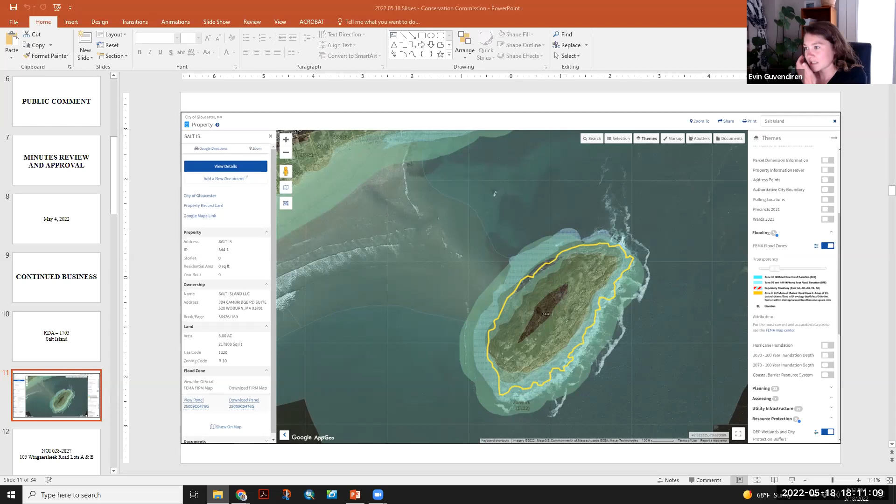Adrian, do you want me to share screen? Nope, I have it right here for you. There you go, excellent. Do you have the other figure perhaps? Sure, okay. This one? Yeah, that one. Yep, thank you.

So, to give a brief recap of the project, the RDA was first submitted in June of 2021 for the use of grazing animals for vegetation management on Salt Island. Since then, we've been retained to provide the commission with supplemental information. We've conducted several site visits and done an inventory of the existing vegetation, and I've also had multiple conversations with Goats to Go.

They're the company that will be supplying the goats, and we talked about means and methods for having the goats out there. First and foremost, Goats to Go is not concerned at all with bringing the goats out to the island. Goats are afraid of water, so there's no fear of them escaping off the island. So the plan is here.

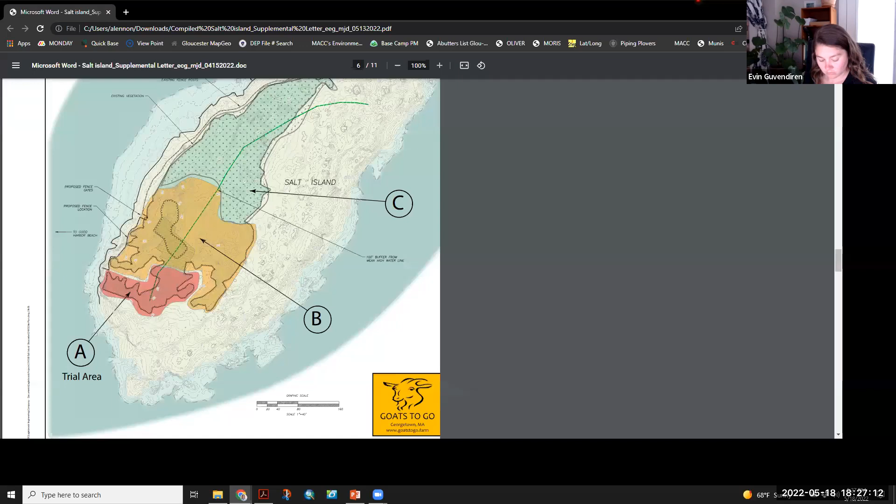I am extremely troubled by the fact that these and other concerns that were put forth at the initial presentation of the project a year ago have not been addressed or even mentioned in the supplementary information presented today. I have little confidence that the community concerns will be responded to if the project is allowed to proceed. Thank you.

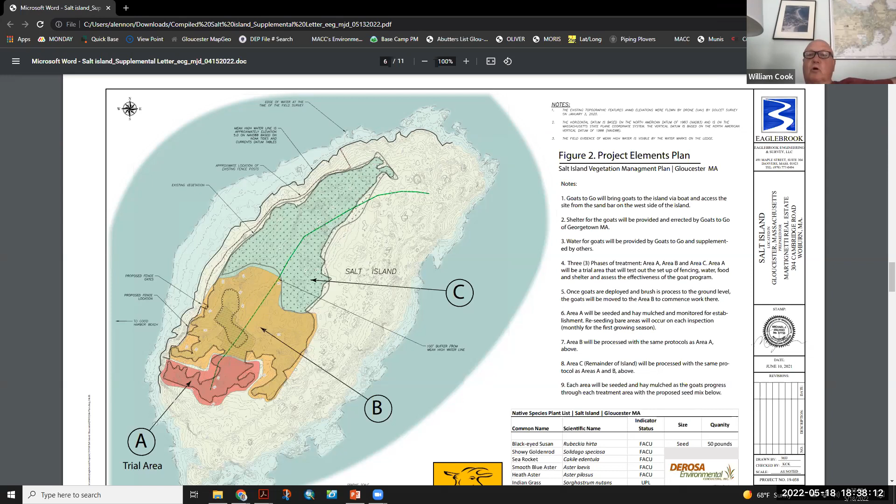Okay, Commissioner Cook. I agree with all the previous comments I brought up, even based on Goats to Go's website. Goats will eat down to the root and denude the entire area. What I'm about to say, I'm not even sure if it's correct, but I am going to strongly suggest that the applicant request a withdrawal without prejudice, because using goats in this area is a no-go. They need to remove everything that they've done and allow the island to revegetate to the point that it was before they went out there and started using chainsaws and crews to pull and remove stuff beforehand. There is absolutely nothing that this applicant can do to convince me to move forward on this, and using goats is a non-starter to begin with. Thank you.

Okay, Commissioner Gradwell. I think that everything that I could possibly bring up has been brought up, and we'll just wait for some good answers, including why not use a hand pull.

Okay, Commissioner Sargent. Yeah, the coastal bank, which is a resource area, isn't delineated on the plan. And it appears that these proposed activities are in that resource area and not in a buffer zone. Then the exception for the grazing of animals and installation of fences is not valid because the applicant has not provided sufficient information that the shallow overburden of soil on Salt Island would not be eroded by this proposed activity. I believe there should be an NOI, the detailed vegetation management plan, if the applicant wishes to proceed.

Thank you. Okay, Commissioner Sherman. You are muted. I'm sure Chris Leahy knows this better than me, but perhaps other people do as well. But I'm concerned about the

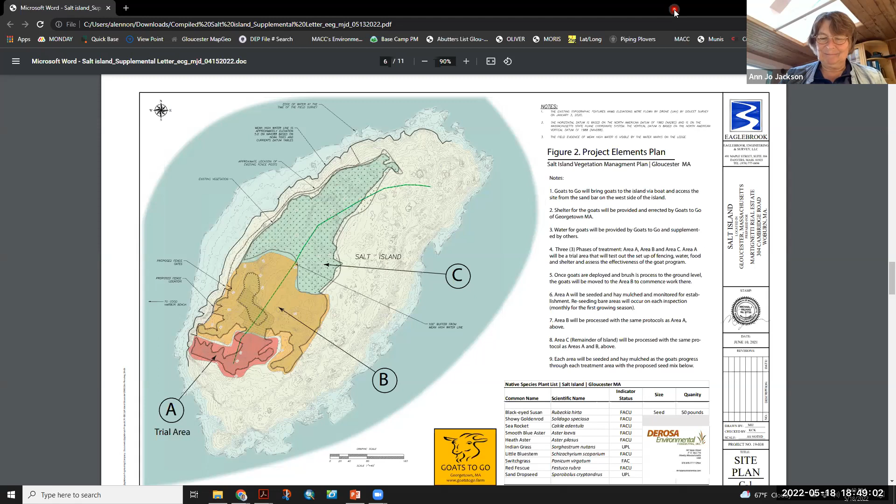Thank you, all. Evan, have a good night. Adrian, we will miss you. Oh, you will see me around, I'm sure. Good night, everyone. Good night, Mike. Good night.

Okay, next up we have NOI 028-2827, 105 Wingaersheek, lots A and B, owned by 125 Wingaersheek LLC, represented by Joel Favazza of Seaside Legal Solutions LLC.

Good evening. For the record, Joel Favazza, Seaside Legal Solutions, 123 Main Street in Gloucester, here on behalf of 125 Wingaersheek LLC. At our last meeting, I had proposed to the commission that a letter provided by Mike Seecamp be considered as a replacement for the third-party review, which has not yet happened.

Again, this stems from commissioner concerns primarily relating to isolated wetlands down by the road, to see whether they were hydrologically connected to a larger wetland system on the other side of the road. There was also some question about the impact of a second driveway being proposed.

Basically, to get a handle on it ourselves, we went and had a third party kind of informal review done for us by Mike Seecamp. And anyway, at the last meeting, I suggested that might be an alternative.

The commission hadn't had a chance at that time to actually vet that letter, so we decided we'd come back in two weeks and see what the will of the commission was—whether they thought Mike Seecamp's February letter was acceptable and gave the commission sufficient comfort to move forward, or if the commission still felt like we needed to go get yet another set of eyes on the delineation and proposal.

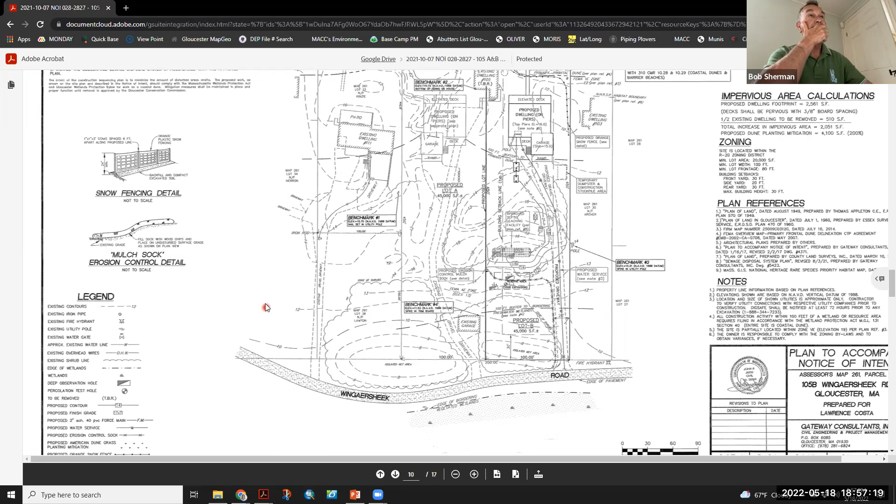Chairwoman Jackson. I also agree with the third-party review. I think DEP is very clear that there is no new construction in primary dunes, and this has to qualify as new construction, with primary dunes being significant to storm damage and flood control. So I am not willing to make a decision on this project as it stands.

Okay. Did you have any further comments, Adrian? No. Mr. Favazza, would you like to respond?

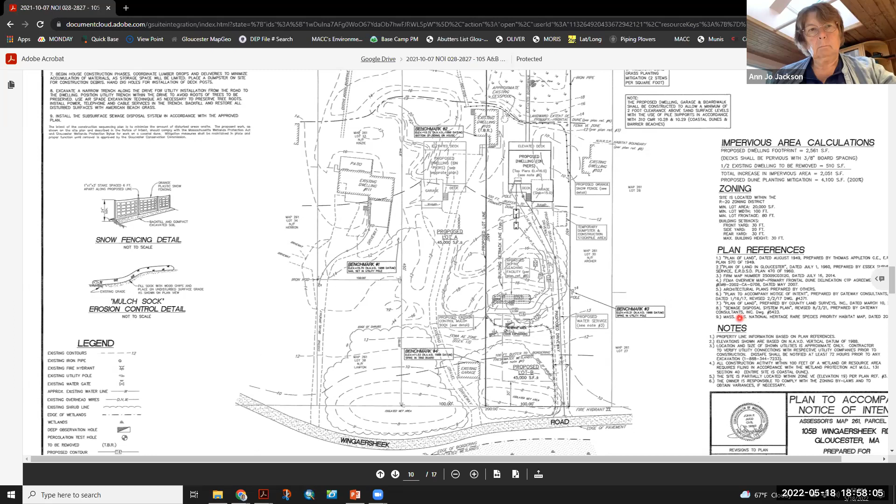Yeah, thank you so much. So to the question posed by the neighbor, I want to just respond that yes, both proposed houses as shown are further back from the primary dune than the existing house, and further back than a house with about 4,200 square feet more disruption that you've already permitted on this site. The large house you previously permitted on the site, without third-party review mind you, is level with the existing home, and that's building permit ready right now. We're trying to go to 2 smaller homes further back from the dune. So to the neighbor's question, yes, if we're able to build these 2 smaller houses, we will be further back from the primary dune than the existing house. If you're not able to build these 2 smaller houses, then no, the much larger house is going to be built right up to the line where the existing house is.

And then also for the commission's edification, John Judd, who prepared the plan, is on the call tonight, and Mike Seacamp, who wrote that letter, is on the call. So if, for example, there are any questions about the 8-foot contour determination or about the primary dune delineation that would enable this commission to move forward, he can probably answer those questions for you versus us going back out. But again, it's the commission's will. If you say we need a third party, we need a third party, but he is here tonight and could potentially quickly answer those questions you may have after reading his letter.

Okay. Go ahead. That's all I have. Thank you. Okay. Does Mr. Judd wish to speak?

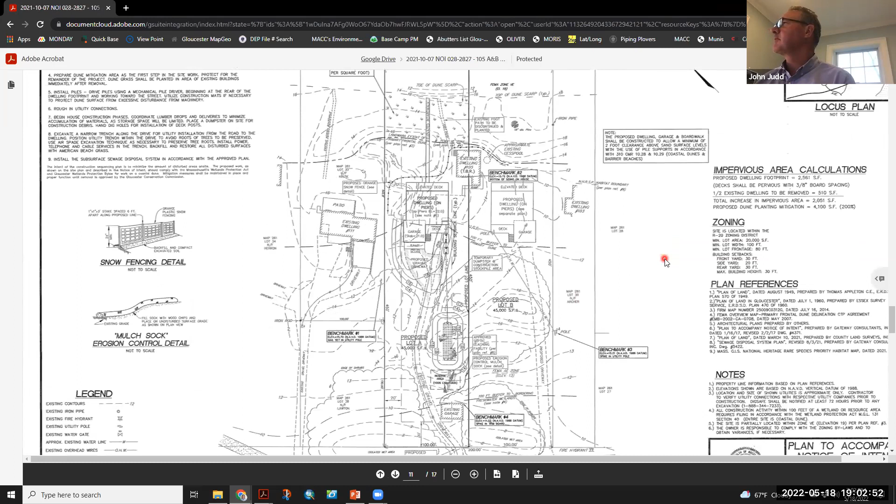Okay, thank you. Did you have anything else to add? No, other than I know that the previous project is not on the table, but just looking, the issues usually are impervious surface, not how many buildings, but how much surface is being created in a resource area like this, and there is a reduction from what was previously approved. I'll leave it at that, thank you.

And that is absolutely the case in redevelopment. This is not redevelopment. This is new construction, and it's new construction in a primary frontal dune, which is assumed to be significant to storm damage prevention and flood control in and of itself. And I don't see how this rises to the standards of permittability.

Well, if I may, Madam Chair, the reason that there isn't just a machine that we check a bunch of boxes and say does this qualify or not, the reason there are humans involved in this, so there is a pragmatism to this, right? And if your charge is to do what is best for the ecological resources on site, well, I appreciate, as Ms. Lennon has educated us.

Previously, and as you've explained tonight, this is a de novo review, and you are comparing what the plan is. You are human, you are knowledgeable of what is going on in reality out there. And I would urge the commission to make choices that lead to ultimately the right construction project happening out there versus the one that technicalities may force a less desirable situation for the resource area than being pragmatic and looking at the situation in reality, not just in technicalities.

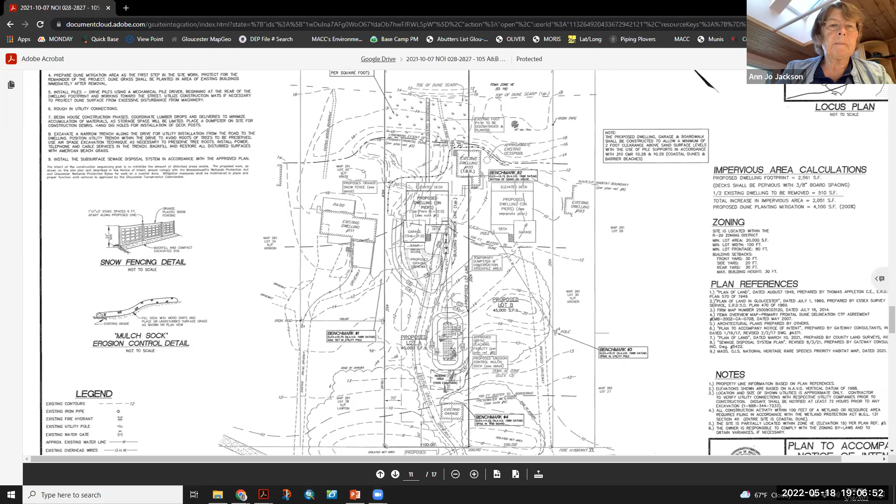Mr. Gradwell? We lost him. No, he's with us. He says yes, I see him. Commissioner Sargent, Yes. Commissioner Sherman, Yes. Chairwoman Jackson, Yes. Thank you.

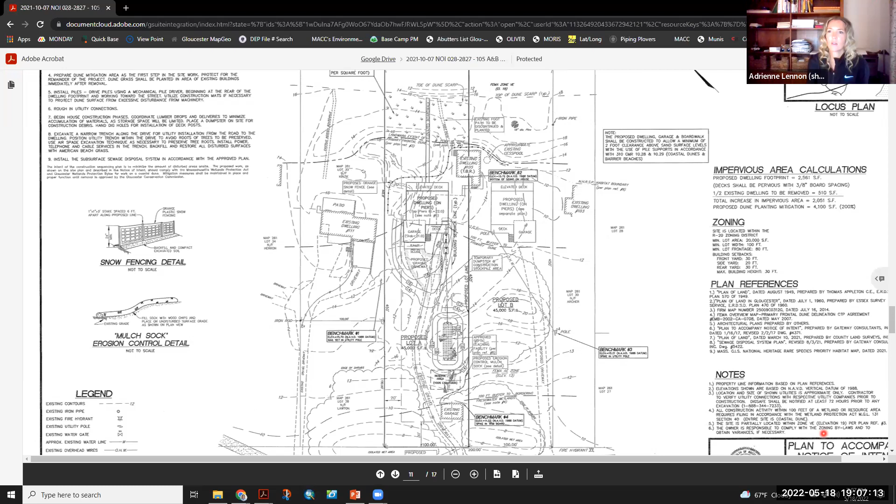I want to comment for the edification of the public. I can see there are a couple of hands up in the attendees, however the public comment period has closed for the hearing for 105 Wingaersheek tonight. So if you are aiming to comment on 105 Wingaersheek, that opportunity has passed for tonight. You can always submit your comments in writing to conservation@gloucester-ma.gov, using 105 Wingaersheek Road lots A and B in the subject line, to have the conservation clerk, Deb Laurie, put it in the administrative record. Otherwise, you will have to wait till the next hearing on June 15th to speak.

And the next opportunity to speak will be on the next matter before the commission. Now I'm studying this, and Dave Caouette, you are here tonight. The commission has not moved 51 Forest Street yet. If you would like, we can certainly open the hearing still. Yes, please. Okay, we will now hear NOI 0282836 at 51 Forest Street, Haskell Pond, presented by City of Gloucester DPW, represented by David Caouette at Pare Corporation.

Yes, thank you very much for hearing us today. I also have with us Lauren Gluck, one of our wetland scientists. When we last spoke, it was at the March 18th meeting, and there were a couple of comments to our plans. We also met on site to do a site walkthrough on April 26th with a few members of the commission. At that time, we did the site walkthrough, mainly to illustrate to the commission the scope of the work.

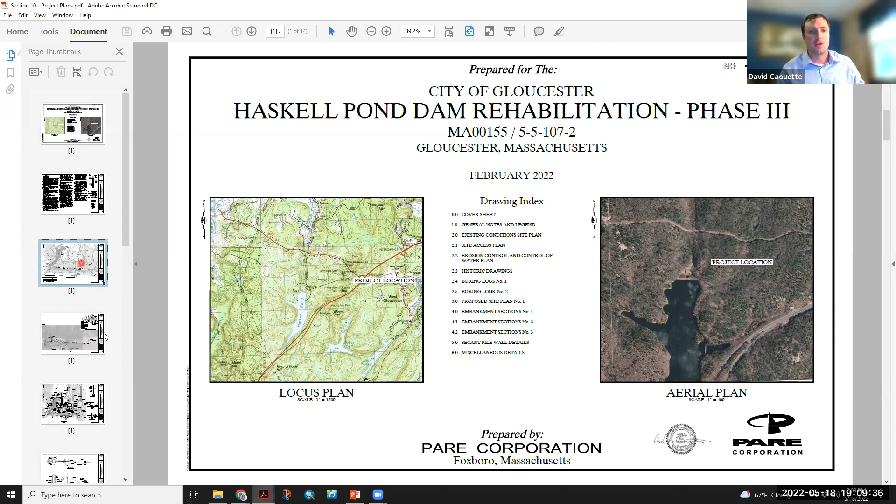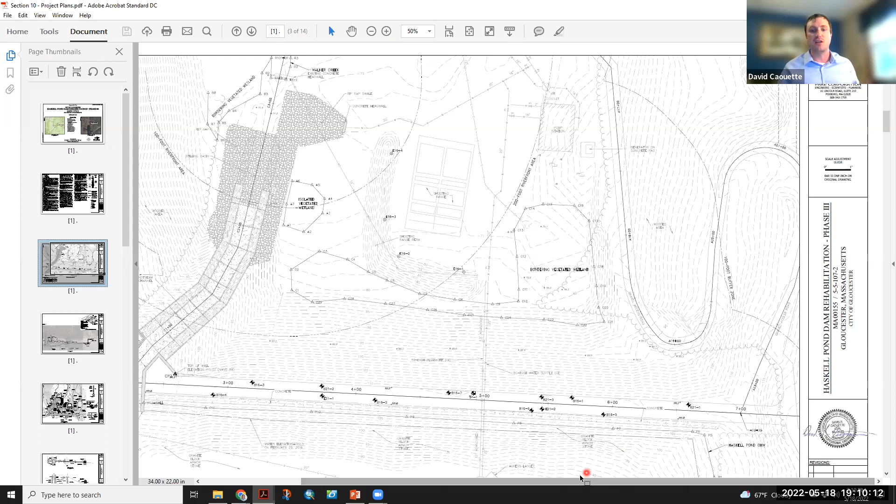So on sheet 2, in the walkthrough, we did walk through the secondary access road, and the general comments from the commission were that it was a much more established road than previously thought, but the comments were that we should remove the secondary access road from this submission, as it did represent a slight change from what we had permitted back in 2016, and that if we do need the secondary access road as we progress with the construction efforts, that we permit that through a separate process.

So on sheet 2.1 of our plans, we have that secondary access road removed. I'm not sure, I have an updated set here. Adrienne, if you want me to share my screen, because on the drawings you have here, you can see that secondary access road going through the woods. Right, and you're removing this from the plan set. Correct. Okay, I can give you permission to share. Go ahead.

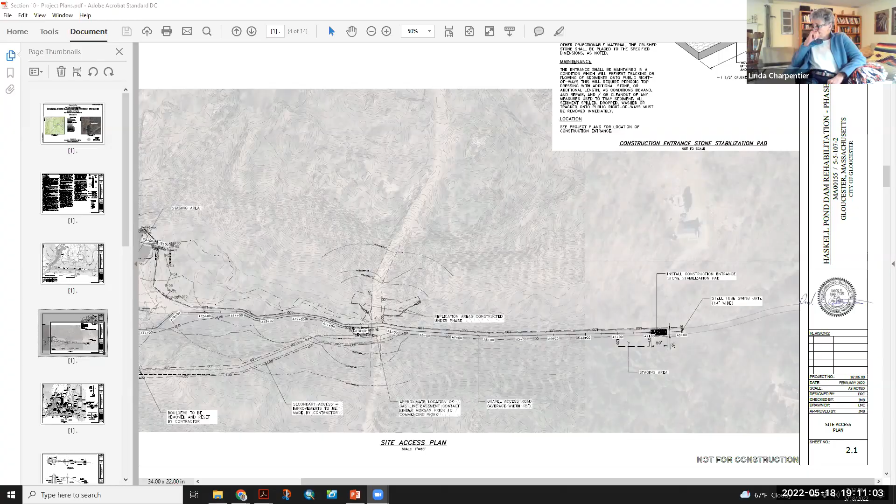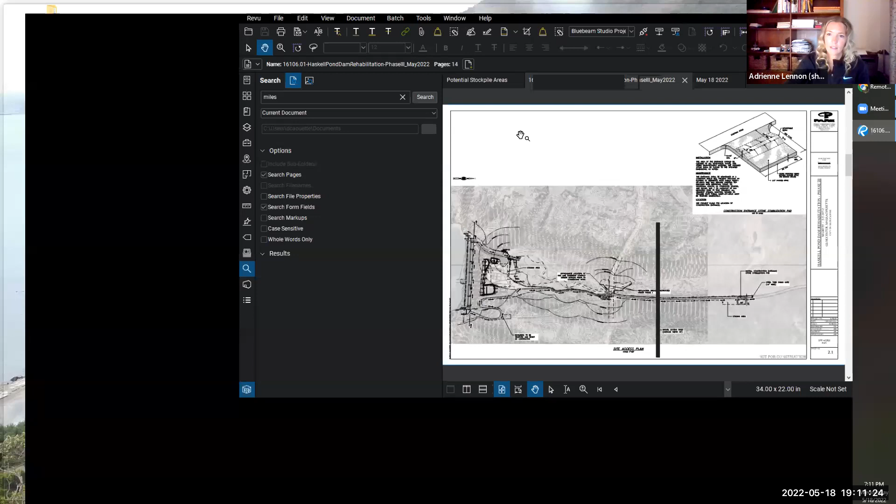Should be it. So can everybody see the screen? Yes. Okay, so as you can see here, the secondary access road. Whoa, what are we looking at? Sorry, we're looking at a nice bridge. Golden Gate Bridge. That was the Golden Gate Bridge.

Just checking. Okay, here we have removed the secondary access road. We still have the outline of the road highlighted, but we've removed it from the limits of disturbance. So in the future, we'll have a couple more conversations with potential contractors. If we deem it necessary, we'll submit that as a separate permanent access route.

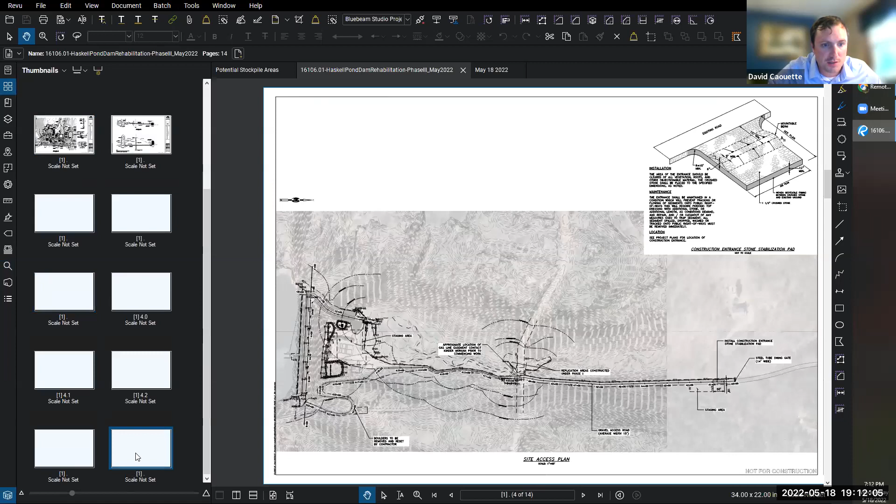The other change that we made to this sheet in response to commissioner comments was we added a detail for an erodible material stockpile. Basically we would surround the material with compost filter sock on the site, and then we have a note that if the material is not being planned to be used or filled in within a certain number of days, then we would cover that stockpile with a geotextile filter fabric, which would help shed rain off the pile before it could really erode the material. And then, as normal in our construction specifications, we would require the contractor to regularly check the erosion controls and make any necessary repairs or move built up material as needed.

As relating to one of the commissioner's other comments, we had some estimates for the amounts of material that would be generated.

So this is one of the sections of the dam where we would be excavating down to install our secant wall and parapet wall. Top of the dam is currently at elevation 111. We would have to excavate down to elevation 103 to create a working platform large enough for the equipment to install this structure. There'll be some isolated excavation in sections that will go down as far as elevation 100, just to stabilize the working platform and remove potential obstructions that may interfere with the equipment needed.

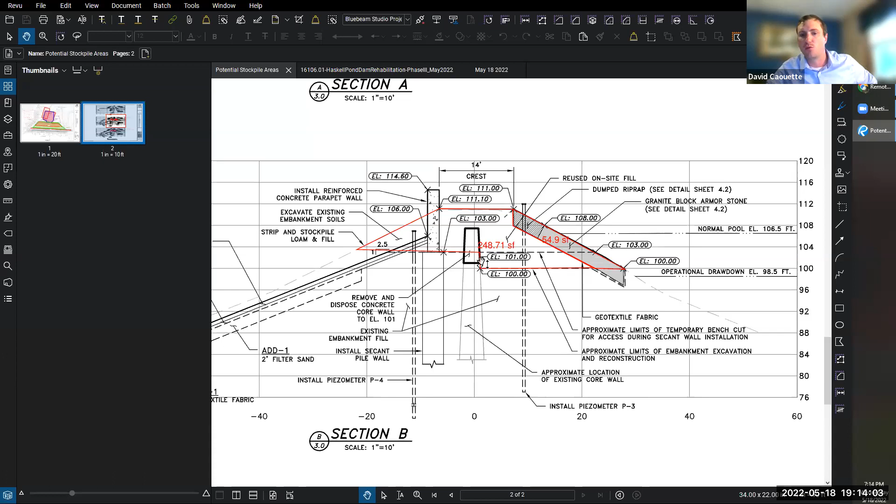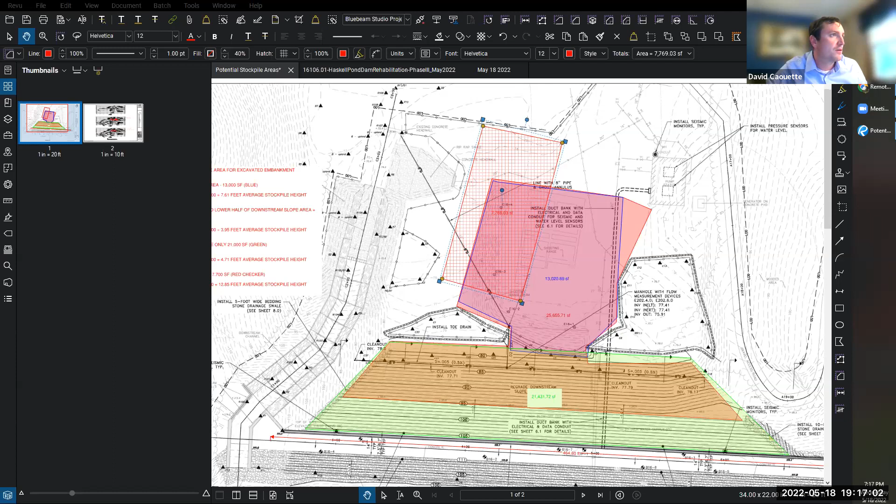We did have a meeting with Ms. Tori Kim, who is the MEPA director, or assistant secretary there. We had a conversation with her back in, I think it was in February -- it may have been, it was November. Okay, it was back in November, but then we followed up with her because we didn't have anything in writing from the meeting.

So we asked her to provide a comment to the commission saying that there would be no additional MEPA review. And she then followed up pretty recently, I think it might have been last week, saying that it would not require further MEPA review. You have the email pulled up.

Okay, great. And that no other state permits are needed for the work. So that is accurate, that all the state permits accounted for in the original MEPA filing, that's not changing. There was one state permit we did not move forward and obtain yet, which is the dredge water quality certification, but that was only required for the phase 3 work, which is forthcoming. We did account for that in the MEPA filing, and the dredge water quality cert office was copied in the distribution list for the ENF. So I think we're pretty satisfied with her response that there's no more MEPA review needed.

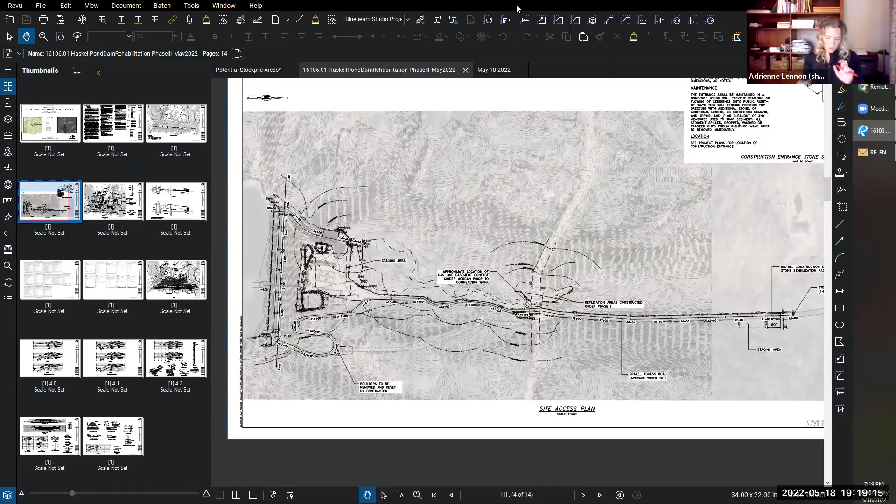Okay, thank you very much. I'll close the public comment period and move on to commissioner comments. Commissioner Charpentier, no comments. Commissioner Cook, no comments. Commissioner Gradwall, no further comment. Commissioner Sargent, no comment. Commissioner Sherman: my primary concern after the site walk was the secondary access road itself, and as that is no longer proposed, I have no other comments.

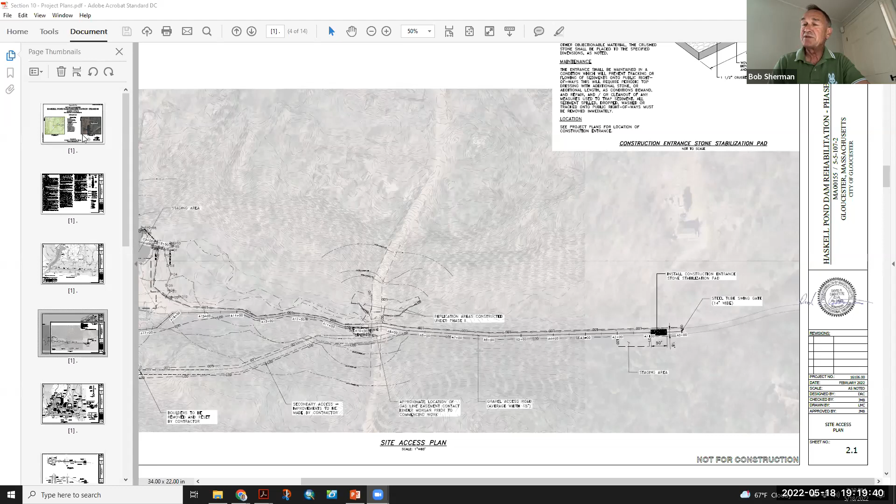Co-Chairwoman Jackson: I have no comments other than appreciation for the responsiveness. Thank you. In that case, I think we are ready to move forward.

I'm willing to entertain a motion to close the public hearing for NOI 0282836. Charpentier moves to close the public hearing for NOI 0282836 at 51 Forest Street, Haskell. Gradwall seconds. Roll call: Commissioner Charpentier, Yes. Commissioner Cook, Yes. Commissioner Gradwall, Yes. Commissioner Sargent, Yes. Commissioner Sherman, Yes. Co-Chairwoman Jackson, Yes. Thank you.

We'll entertain a motion to move forward with the project. Charpentier moves to approve NOI 0282836 at 51 Forest Street, Haskell Pond. Gradwall seconds. Before I do a roll call, Mr. Caouette, could you please make sure you send me those updated plan sets and the MEPA email if you haven't already? I am a little underwater. Yep, I will. Commissioner Charpentier, Yes. Commissioner Cook, Yes. Commissioner Gradwall, Yes. Commissioner Sargent, Yes. Commissioner Sherman, Yes. Co-Chairwoman Jackson, Yes. Thank you.

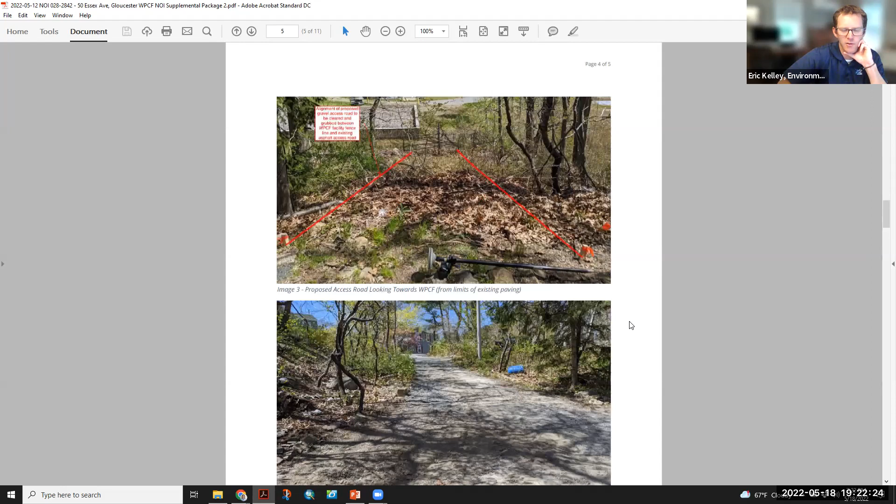We prepared a small supplemental letter that we shared with Adrienne's office, which she has on the screen now, to provide supplemental photography and rough limits of the access road. Generally speaking, the access road is 10 to 14 feet wide and about 60 feet long between the existing treatment plant fence line and where it meets existing asphalt coming off Marshfield Street. So it's roughly 650 square feet. Generally speaking, it's woody debris, leaf litter, relatively free of trees.

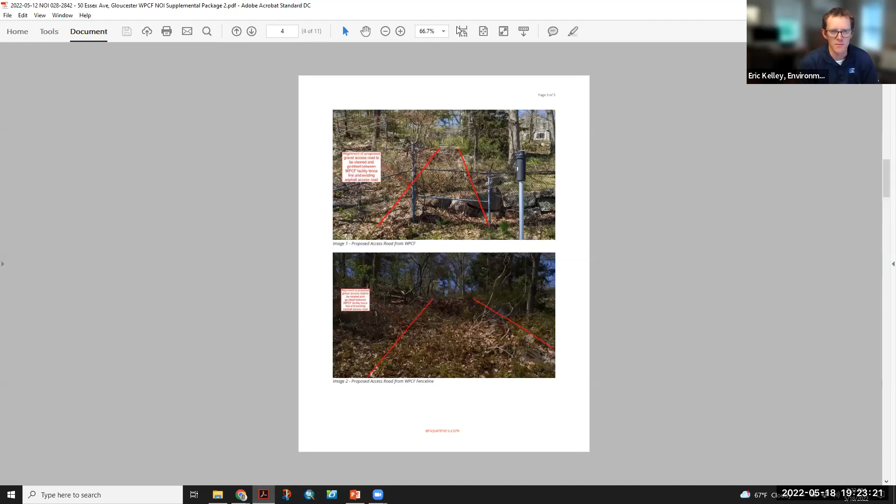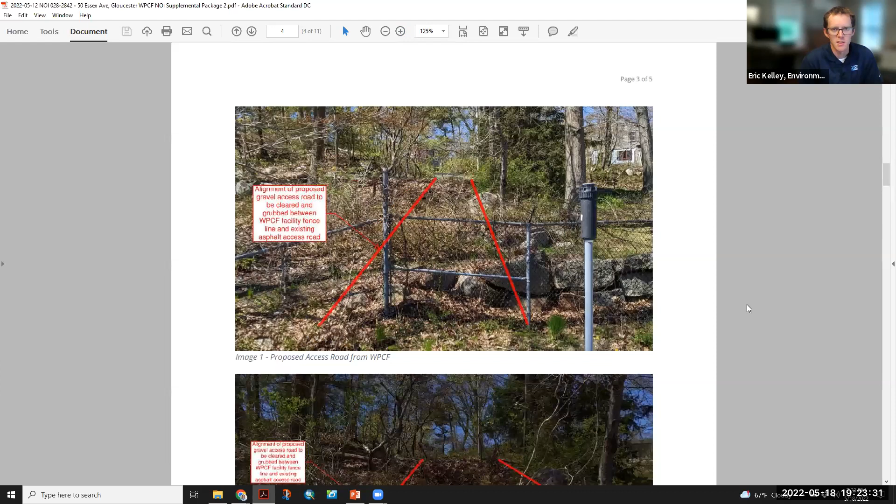There was some invasive species, Asiatic bittersweet, present. The existing trees that were brought up during the last hearing are outside the limits of the proposed access road and actually on the abutting private property to the city's parcel, so those would not be directly impacted by the access road. Generally speaking, we're talking about clearing and grubbing, some boulder removal to allow for installation of the gravel road. We would also be doing invasives removal within the limits of that access road within the right of way. So the photos presented in the supplement show orientations looking uphill and downhill, just to give you a feel for the existing conditions.

The second piece: we worked with Brian Madden from LEC to enhance our proposed restoration plans around the edges of our project. On the western edge, we have the coastal bank that will be abutting our earthen berm, which is part of the flood resilience system. On the eastern side, we have coastal bank that will be downslope of the proposed sheet pile wall. Along Essex Avenue, we have some additional enhancements in currently turf grass areas, as well as the additional plantings we presented two weeks ago at the northwestern corner. That is provided in a supplemental plan that Adrienne has on the screen now. Brian's here tonight if you have any questions regarding the plantings themselves, and Dylan, my colleague, is also here just to answer any questions you might have concerning the restoration or the access road.

Okay, thank you very much. First, we'll open it up for public comment. Is there anybody in the audience who wishes to comment on the project at 50 Essex Avenue, NOI 0282842? Madam Chair, there are 13 panelists on the call, 30 attendees, and it appears no members of the public wish to comment at this time.

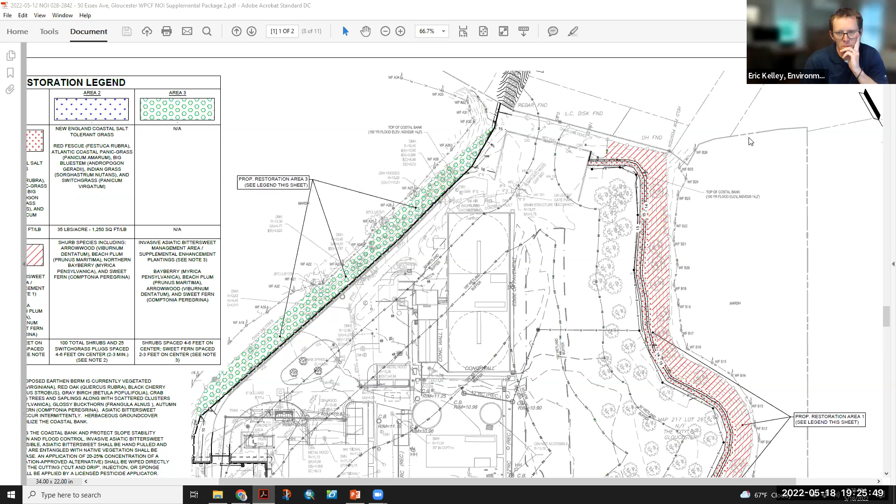Commissioner Sargent: Thank you for the additional mitigation plantings. With regard to the access road from Marshfield Street, could you please explain what, quote, relatively free of trees, unquote, refers to, and the number of trees that maybe are 7 inches or greater in diameter? Finally, there should be a 2-year monitoring for mortality of the mitigation plantings. Commissioner Sherman: No further comments.

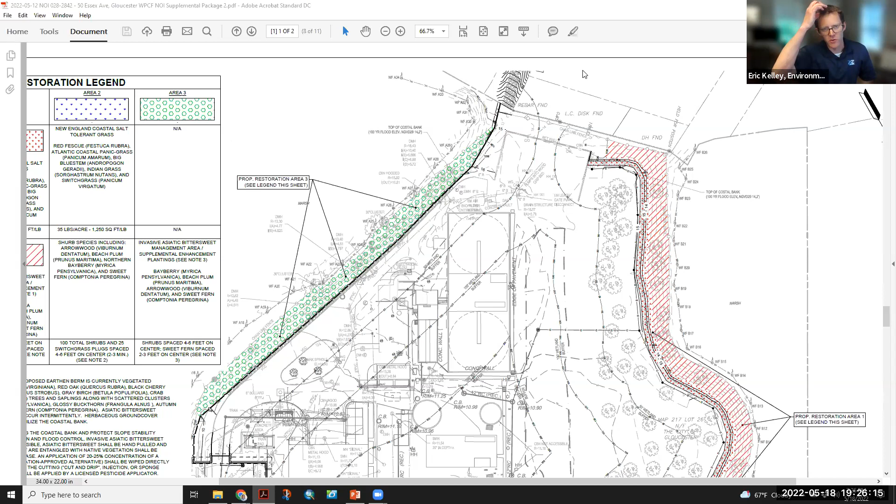Chairwoman Jackson asks for further comment. Commissioner Sargent's question is answered: there are no trees greater than 6 inches within the limits of the proposed gravel access road.

I want to thank Eric Kelley and Environmental Partners for their considerable efforts to install restoration planting and improve the perimeter of the entire property. Once the berm is up, it's very likely it won't be impacted again, so installing nice plantings on the resource area side is a great opportunity, and I'm happy you're taking the trouble to do it.

I'll point out there's some invasive species just off the plan set here, still on the parcel, that wasn't included. My hope is that if Environmental Partners needs to come back and amend the order of conditions, they would include that additional planting and restoration work on this side of Essex Ave. That would make it a very complete site given the circumstances, and I look forward to seeing the finished project.

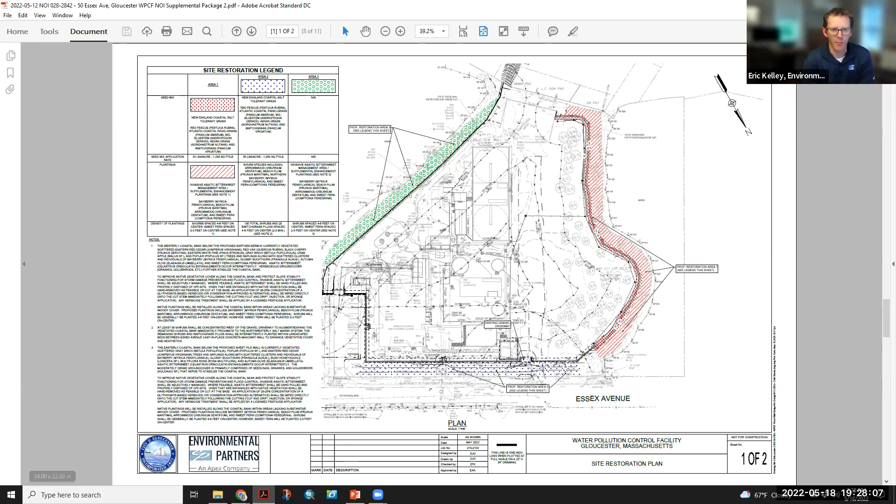Adrian, would that area you're speaking of be the one where I don't know how the boulder pile came to be, outside the fence line to the northeast? That's the corner, correct. It's kind of like Phragmites, but I might be misspeaking—I'd defer to Brian on that. There's a large boulder pile I'm assuming came from past city projects.

Yes, that's correct. Of course, it's not inside the scope of the work tonight, and I agree they've done a very nice job coming up with a robust planting plan, which I appreciate. However, when it dead ends over here, it dead ends into a stand of invasive Phragmites, among other things, and there's some fill and generally degraded blight that will be the last of what's there. So we can bring that up with DPW for consideration, either outside of this project or under a future action.

Okay, thank you very much. I think we're ready to move forward with this. Linda, would you like to make a motion to close the hearing?

Charpentier moves to close the public hearing for NOI 028-2842, 50 Essex Avenue. Gradwell seconds. Roll call: Commissioner Charpentier, yes; Commissioner Cook, yes; Commissioner Gladwell, yes; Commissioner Sargent, yes; Commissioner Sherman, yes; Chairwoman Jackson, yes.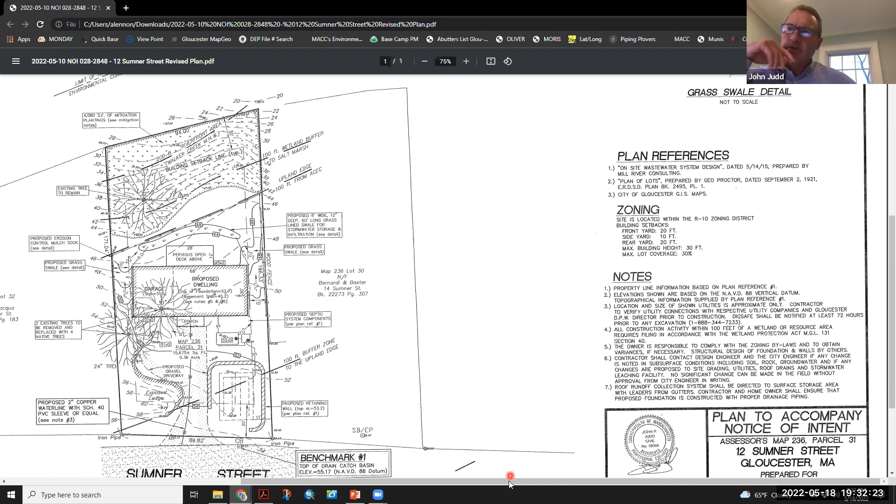In addition, we've added the variance note requested for the proposed leaching facility being within 200 feet of the ACEC—we're just shy of 200 feet, at 193 feet, as shown on the note. As far as addressing the equal and equivalent environmental standards that are required, this is a system that has advanced treatment and pressure distribution.

So that is part of the design. And we did add the impervious area calculations, and we did correct that error with that erroneous number. We did shade the total mitigation area as requested, and as shown on the plan, we have the mitigation notes as well as the impervious area calculations. I just want to remind the commission, we did have a report that was submitted from Mary Rimmer that is made part of this application for the rejuvenation of that buffer zone and the replanting and mitigation.

So I can answer any questions that you might have at this time. Great, thank you very much, Mr. Judd. We'll open it up first for public comment. Is there anybody in the audience who wishes to comment on NOI 0282848 at 12 Sumner Street?

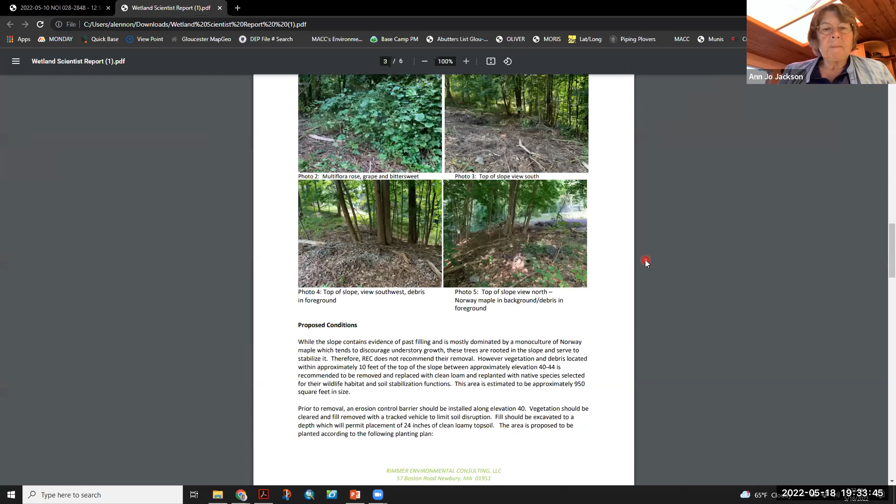Madam Chair, there are 10 panelists on the call, 30 attendees. Christine, I see your hand up first. I'm going to allow you to talk and ask you to unmute. Go ahead, and name and address for the record, please. I'm Christine Baxter of 14 Sumner Street.

The revised plan was only made available yesterday, but there are some things that are concerning about it. The revision is in conflict with the Board of Health approved septic plan. That plan had a reserve leach field that has been removed from the new plan, and the proposed house has been moved forward over the area of the reserve leach field. Should the Board of Health first review any changes now that the plan they approved has been altered?

The Board of Health plan also had specific drainage details to ensure that all drainage would flow away from the leach field and property line, and the revised plan does not include any of those drainage details. Given the size of the proposed home and the amount of impervious area being created, we want to ensure that all water is able to remain on 12 Sumner Street and that there is no runoff onto neighboring properties or Walker Creek or the area of critical environmental concern.

Also specific to this new plan, the retaining wall has been removed from the upland edge, but not replaced elsewhere. This is a concern because much of the construction would be on previously filled land with a significant drop off in the upland area, which flows down to the James property and into Walker Creek. We still have many of the same concerns that were raised at the previous meeting that have not been addressed.

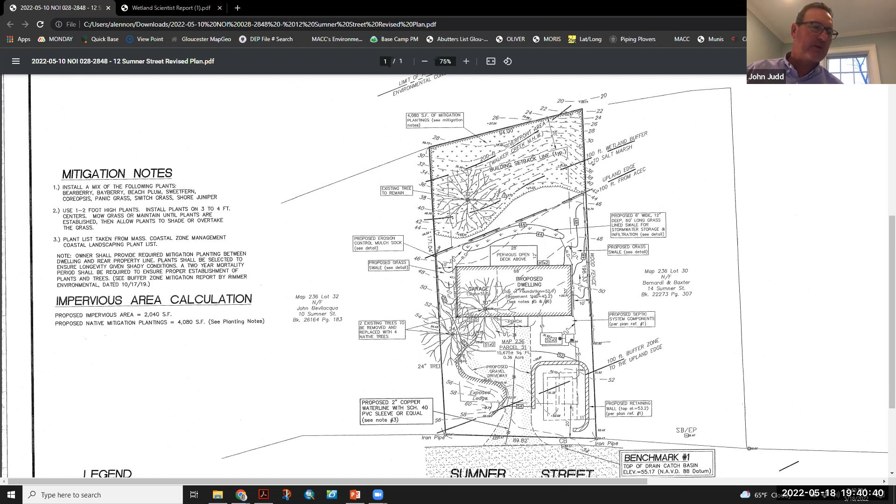Yes, thank you, Madam Chair. I'll go backwards. As far as the drainage, we're showing exactly what was approved by the Board of Health in terms of the retaining wall. And the swales are also very similar, only we're adding additional treatment and mitigation planting. As you know, the drainage, as far as the abutters are concerned, is reviewed - all applications are reviewed by the city engineer, and that is part of the building permit process, as far as not draining onto other people's property, abutters, or the street.

In terms of the ACEC, with the enhancement of the upland edge proposed by Mary Rimmer, as well as the stormwater storage and infiltration area proposed as part of this plan, we are confident, as well as with the erosion control fencing and fortification that will take place during construction, that this will not have any negative impacts to both the ACEC as well as the neighboring properties.

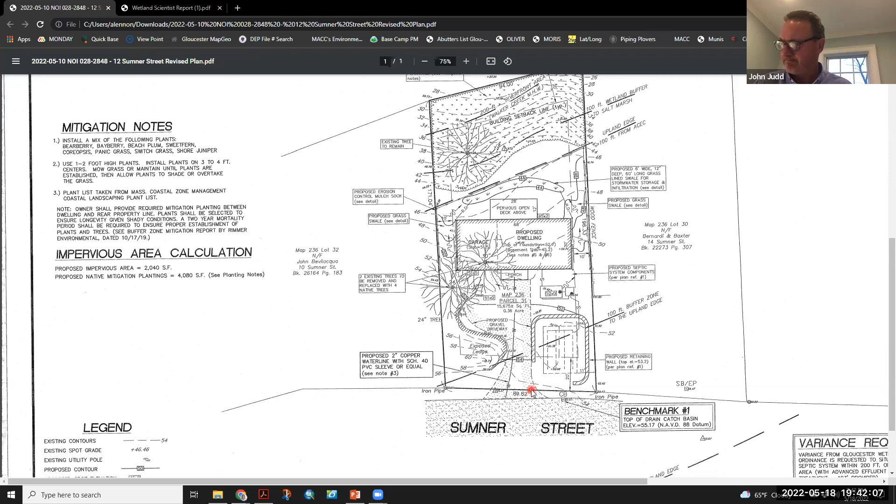And as far as the septic, again, this is what is shown on the approved plan that was prepared by others, and we showed it in the same location, same wall, same height. That's all I can really refer to. That is a plan that was approved in writing by the Board of Health as well, and they can answer any questions you might have. Okay, thank you.

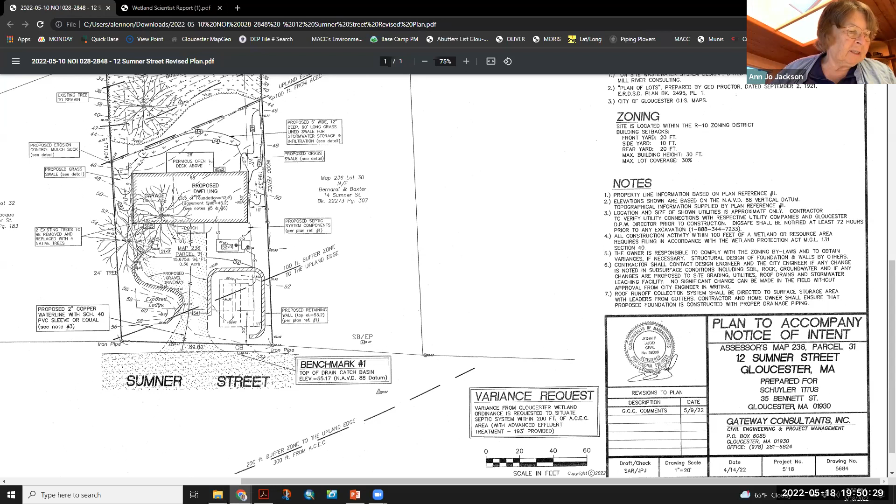Before we start this, I recused myself from this last time. In Mr. Gulla's absence, I will participate with the acknowledgement that I have sporadic social relationships with the owners in terms of occasional golf dates and occasional committee work. However, I feel I can be objective to this if no one objects.

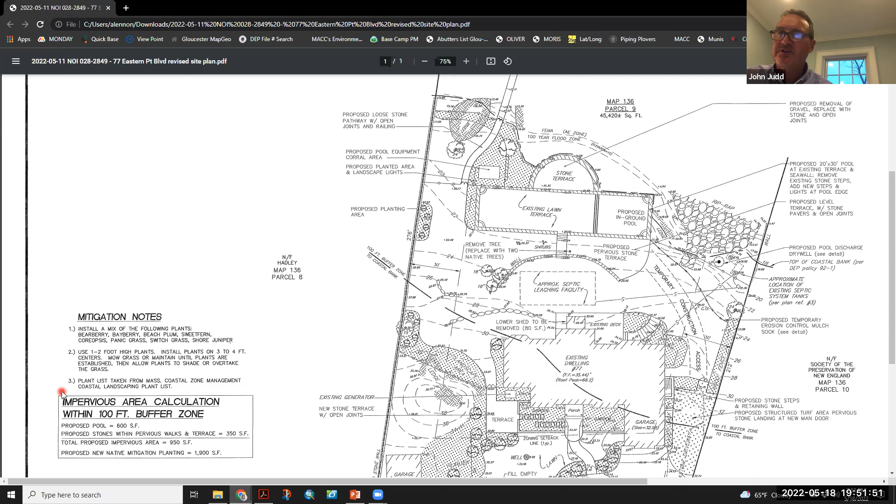Specifically, there was a request for the impervious area calculations, which we've added for the buffer zone impervious area, and the proposed native mitigation planting, which is essentially a large part of this project. The project itself, you may recall, is the in-ground pool construction and extensive landscaping across the property. This is the new home for the applicants, and they really want to spruce up the landscaping.

There was also a request for the pool discharge, where that would be discharged during drawdown, so we've added a detail for subsurface pool discharge drywell for those periodic times when the pool would be drawn down in the fall for winterization. That drywell is shown on the plan where we have sufficient soil, as indicated by the existing tanks installed about 20 years ago. We have some data on the soils over in that area, and that was adequate for the depth.

A big part of what we've done on this revised plan is we removed anything within the coastal bank. There was originally some stone steps that would be rearranged going down into the water within the coastal bank, and that has all been removed. So there's no activity proposed in that location at this time, or going forward.

An erosion control barrier was added, as well as the temporary construction access from the driveway to the pool area. I think that was requested.

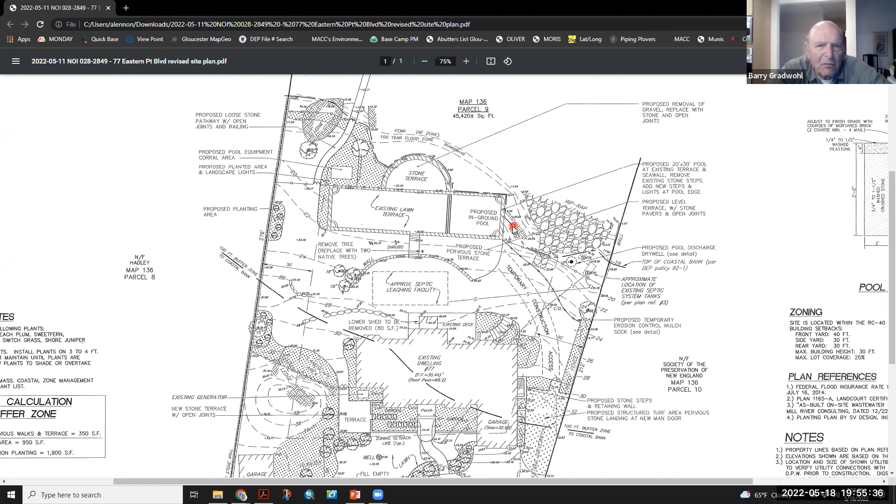Commissioner Gradwohl: appreciates them putting in the drywell and taking the steps out. Very nice job, thank you.

Commissioner Sargent: thank you for the revisions. There should be a 2-year monitoring for mortality of the mitigation plantings. That's it. Commissioner Sherman: no comments. Co-Chairwoman Jackson: no comments. It also should be noted that I did listen to the hearing last time.

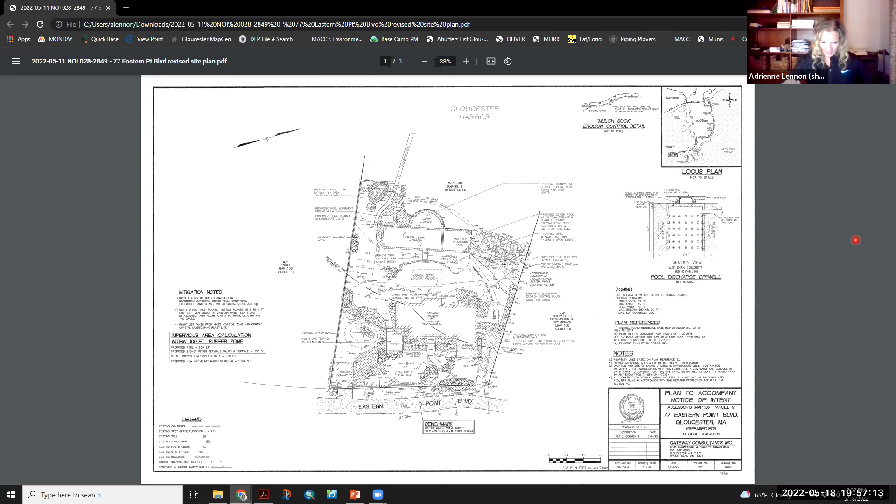I answer to both. Okay, thank you all very much. Have a good night.

Next up we have NOI 0282852, 57 Adams Hill Road, owned by Marilyn Short, represented by William Manuell, Wetlands and Land Management. Good evening everyone. Bill Manuell from Wetlands and Land Management.

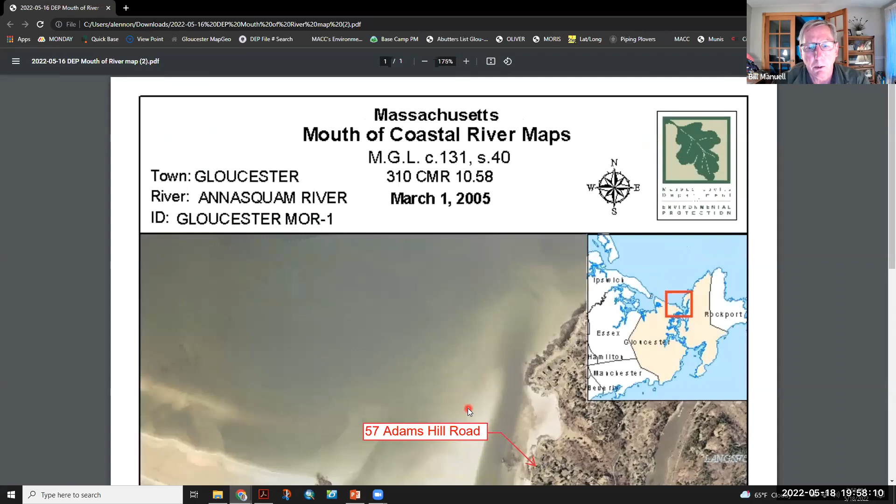We had some discussion at the first hearing. The first thing I'd like to talk about is there was a question of whether there was riverfront area affecting this project. I've submitted the DEP mouth of river map, and there it is. We are well upshore of that, so we are not within the riverfront zone of the Annasquam. We don't have any riverfront area on this property.

Secondly, I submitted a revised plan that cleaned up some drafting details. Adrienne, if you can pop that up, I'd like to walk you through that. I've clarified the limit of the deck that is going to be dismantled and rebuilt by using a single line on the outline of the deck. Recall it had a double line in the last plan iteration, and it was confusing with the limit of masonry walls that are going to be installed on that new pervious bluestone terrace.

The blue line there is the outline of a 2-foot, 8-inch high masonry retaining wall that's going to retain the bluestone terrace. Sitting right where Adrienne's cursor is now is one of those self-contained spas. It'll sit on a concrete pad, filled with water, and you supply power to it. I'm sure everybody knows what I'm speaking of. Surrounding that on the water side is a 6-inch tall granite edging to define a planting bed, so folks aren't looking at the side of the spa.

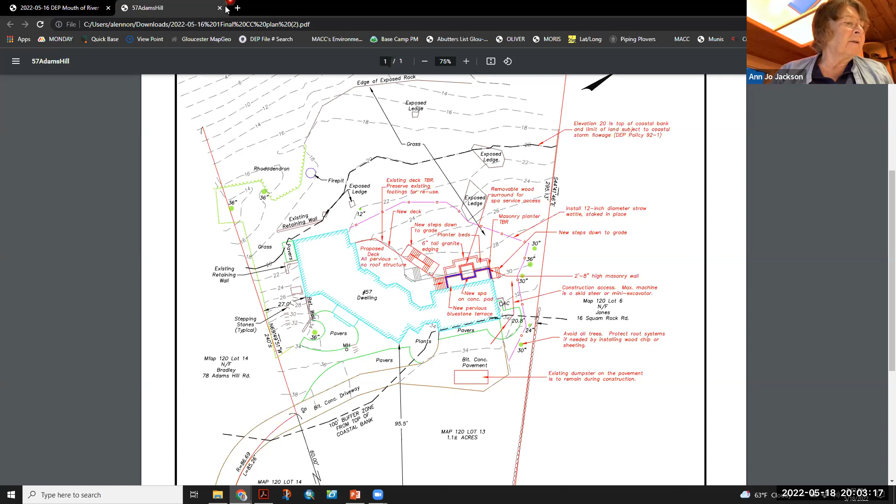Thank you, Mr. Manuell. We are on to new business. First up is RDA 1729 at 233 East Main Street. Robert Bradshaw is the applicant and the presenter.

Mr. Bradshaw, are you with us? There he is. Oh, I see two. I shall promote you to panelist. Okay, both of you, both Robert Bradshaws. Mr. Bradshaw, if you could give us your name and address for the record and summarize the project for us. After you unmute yourself.

Should we table him and come back? Well, I did see, Mr. Bradshaw, you were able to unmute for a minute there.

Unmute. Can you hear me? Yes, yes, good. There you are, Mr. Bradshaw. The screen went blank for a while. I'm sorry, it said I'm joining a different meeting, I don't know what happened. Well, I'm glad you're with us now. If you could give us your name and address for the record and a brief summary of the project, we'd appreciate it.

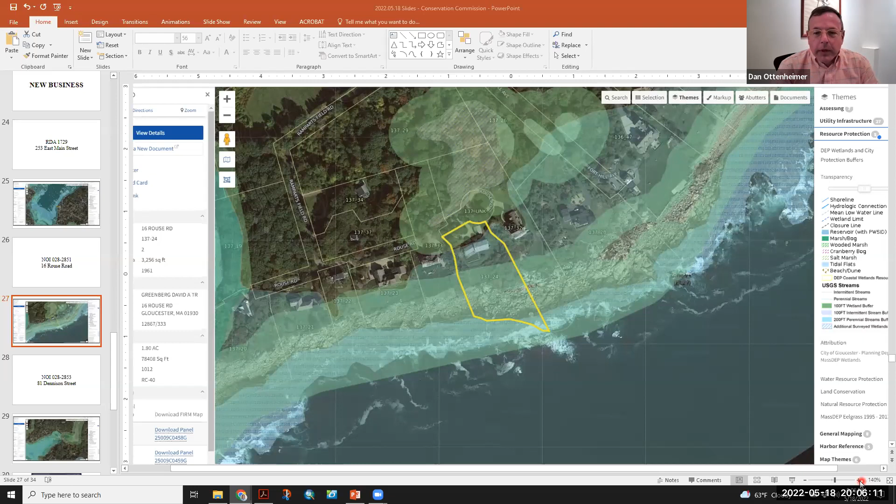Good evening, Madam Chair and Commissioners. Dan Ottenheimer, engineer with Mill River Consulting in Gloucester, here representing Kathy and David Greenberg. They own a house—if you squint hard enough, you can see the Queen of England, perhaps. It's a lovely location, right on the water. And they are voluntarily undertaking a fix-up of their septic system.

So that's the only thing that's in front of you. The house is not for sale. They just know that they have some operational issues and they want to do it right. And so that's what we're doing here.

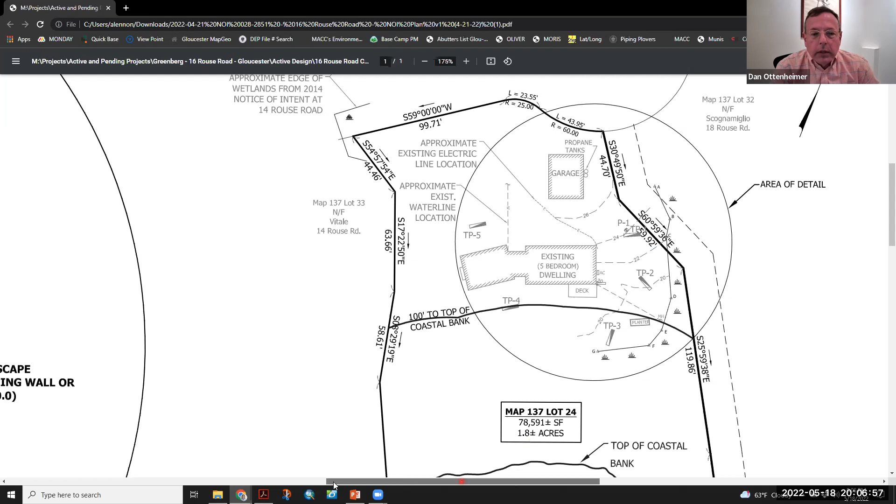So I met the health inspector out at the site and we dug a number of test holes all over, and it turns out where the current system is, that's pretty much the only suitable location for a replacement septic system. It's going to be a very sophisticated type of septic system to clean up the water before it goes out into the ground, and it's also going to spread the water out throughout the entire leach field to get further treatment as well. So this has been approved by the Board of Health.

And the work is proposed—most of the site is in the flood zone, so we're within land subject to coastal storm flowage, and we're in the buffer zone to adjacent bordering vegetated wetlands as well. So obviously we're proposing erosion control between the area of construction and both the ocean and the freshwater wetlands. And that's the project in a nutshell.

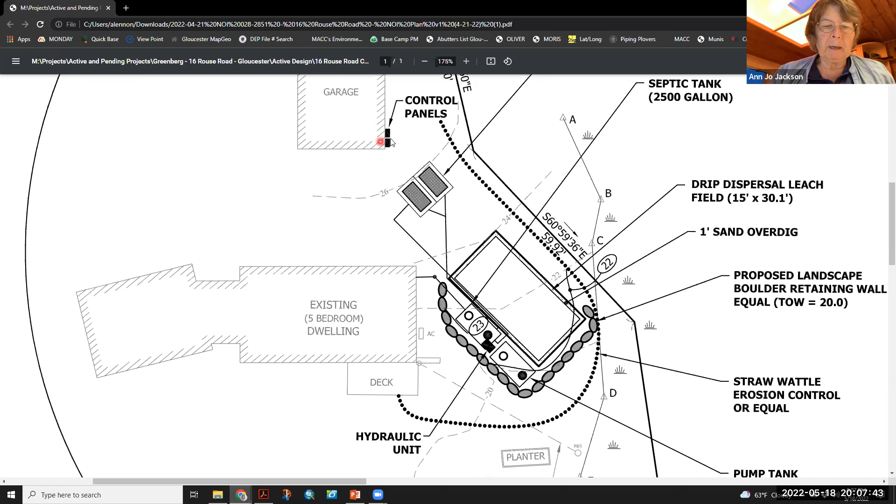Okay, thank you very much. We'll open this up for public comment. Is there anybody in the audience who wishes to comment on the project at 16 Rouse Road? Madam Chair, there are 9 panelists on the call, 15 attendees, and no members of the public to comment at this time.

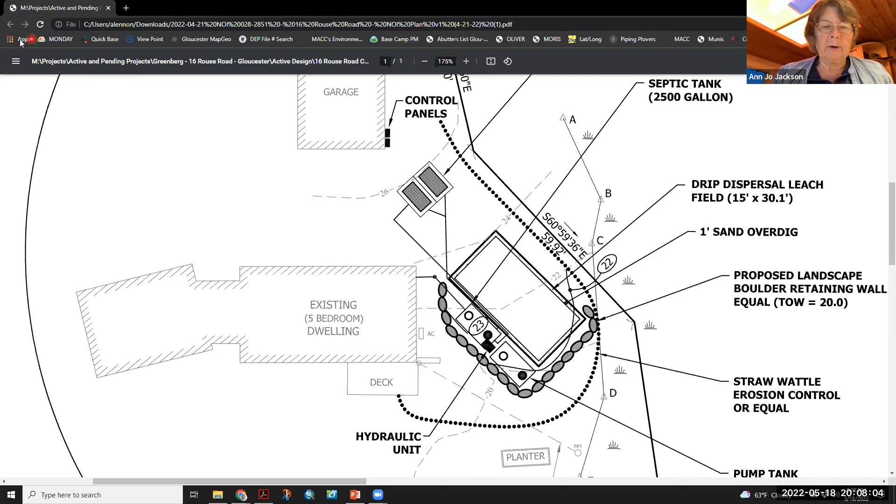Okay, then I'll close the public comment period, and we will move on to commissioner comments. Commissioner Charpentier—no comments. Commissioner Cook—not at this time. Commissioner Gradwell—no comment.

Commissioner Sargent: Yes, Dan, I understand it's an Advantex system, which is a great system, but I'm wondering if it's going to be configured for enhanced nitrogen removal. Thank you. Okay, Commissioner Sherman.

I guess I would just like to hear the agent's opinion on this. I'm sorry, Chairwoman Jackson—no, I have no further comments.

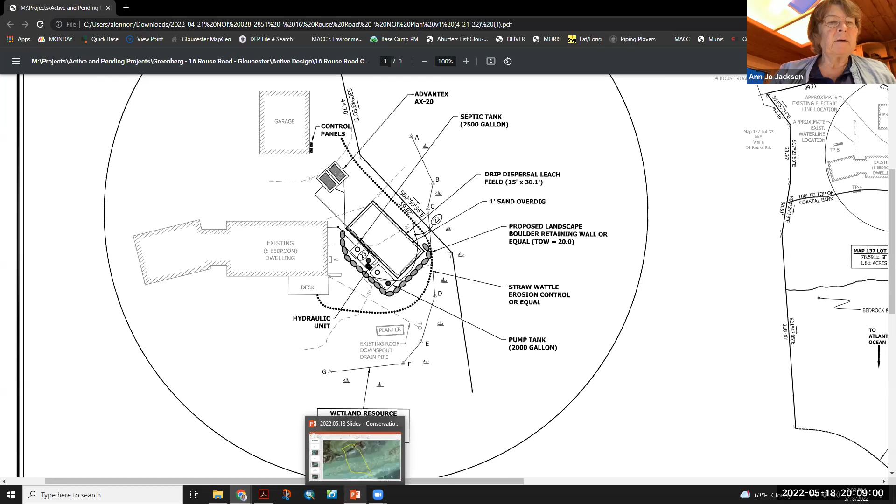Adrian? Okay, we did get comments from DEP, and I also did notice that this project is, of course, falling inside of land subject to coastal storm flowage. It also appears to be 1 inch away from the buffer zone delineation, and so it is likely that discharge is going to impact the resource area. However, understanding that there's very little soil out there on the site, there is an existing septic system on the site, and apparently no other way to locate a septic system.

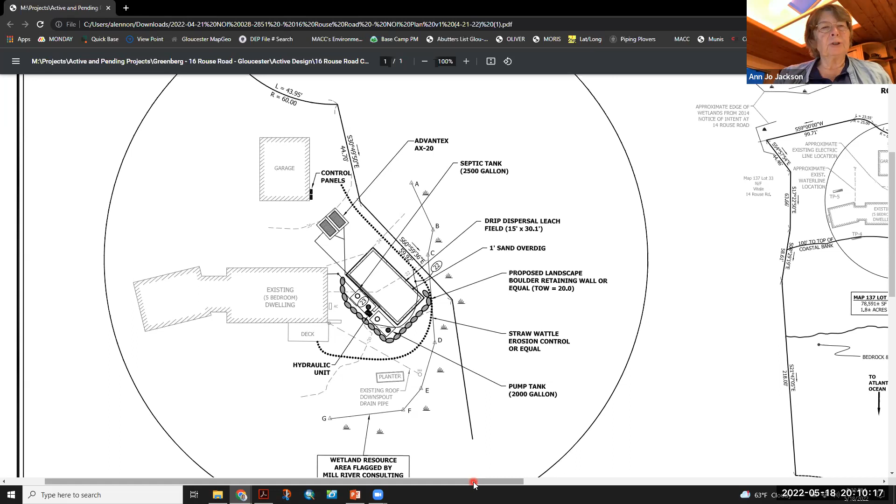It does seem that enough of a hardship has been demonstrated here to allow for the upgrade to take place where it is. I will point out that it is the scope of the Board of Health to identify whether or not there will be an increase in impact. And because it's an advanced system with pretreatment and drip dispersal, I think that is probably the best we're going to get here. I will turn it over to you, Dan. Okay, thank you very much. All right, are there any further comments? If not, Mr. Ottenheimer, would you care to respond?

Thank you, everybody, for your interest. Commissioner Sargent had a good question, because there is a way to configure this type of treatment system for removing nitrogen, through the use of a recirculating splitter valve, and that will be included as part of this project.

Okay, good. If there are no further comments, I think we're ready to move forward. Linda, would you like to close the hearing? I would love to do that.

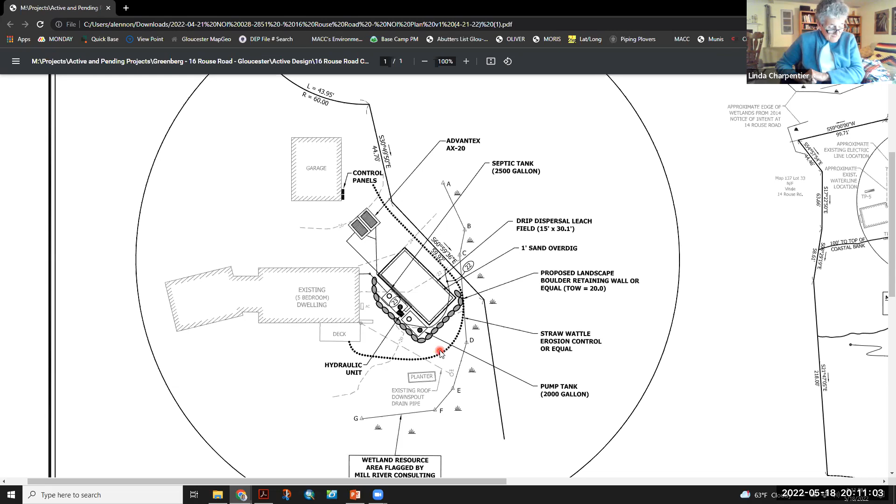Charpentier moves to close the public hearing for NOI 028-2851 at 16 Rouse Road. Gradwell seconds. Roll call: Commissioner Charpentier, yes. Commissioner Cook, yes. Commissioner Gradwell, yes. Commissioner Sargent, yes. Commissioner Sherman, yes. Chairwoman Jackson, yes.

Thank you. Charpentier moves to approve NOI 028-2851 at 16 Rouse Road. Gradwell seconds. Roll call: Commissioner Charpentier, yes. Commissioner Cook, yes. Commissioner Gradwell, yes. Commissioner Sargent, yes. Commissioner Sherman, yes. Chairwoman Jackson, yes. Could we also have a copy of the Board of Health approval for our files, please?

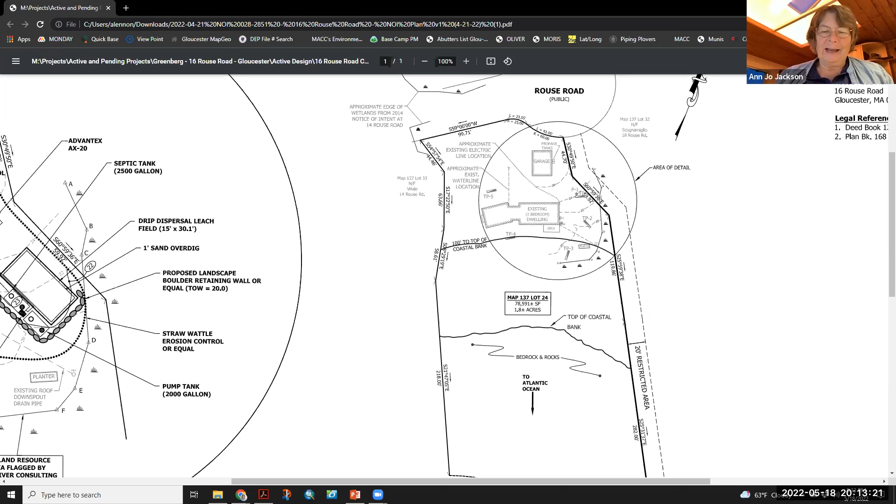You're welcome. Do we have Mr. Bradshaw back yet? Yes, Mr. Bradshaw is back as an attendee. So Mr. Bradshaw, I'm going to promote you to panelist, and now you're on the panel side. It will take a moment for you to connect, but you should be able to use your microphone and screen, hopefully, if you have those things. Here's a camera, there's a mic. And now he's off again. Okay, we'll take him as an attendee next time. Okay, you want to move on? We can move on, yeah. All right, Mr. Bradshaw, we're tabling you again, we will get back to you.

We're going to take up NOI 028-2853 at 81 Dennison Street. Jeffrey and Andrea Lovely, represented by William Manuell, Wetlands and Land Management, Inc.

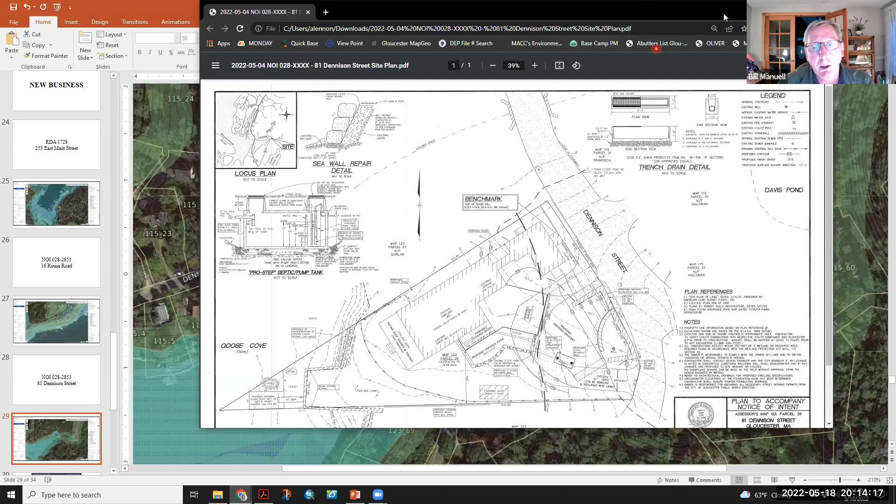Good evening again. Jeffrey and Andrea are relatively new owners of the property. 81 Dennison Street is at the very head of the cove. It's a little triangular piece of property. The house is all the way over to the right of the property. Basically there's a large horseshoe driveway that's all paved, and there's essentially grass from Dennison Street down to the edge of the water. The water shoreline is improved with an old wharf with a masonry wall around the perimeter on three sides of the wharf.

And then there's what used to be probably either a loose mortar wall or just a dry set boulder wall, but that's basically sloughed into the marsh, and that'll be part of the discussion of the application.

So the big part of the application is to add on a garage and shop addition on the right side of the plan where Andrea is indicating now. You can see there's a horseshoe-shaped paved driveway that enters at two locations off Dennison Street. We're going to make that into a pea-stone driveway and move it over a little bit so there's better visibility when you enter and exit the property.

It's sort of a little bit crazy, the grades coming off Dennison Street are a little dramatic. I know when I pull in, I'm kind of looking at the sky for a little bit before I actually nose down into the property. We'll try to fix that a little by easing the grade off Dennison Street, but it's a proposed addition - there'll be some digging for the footing, a little bit of grading.

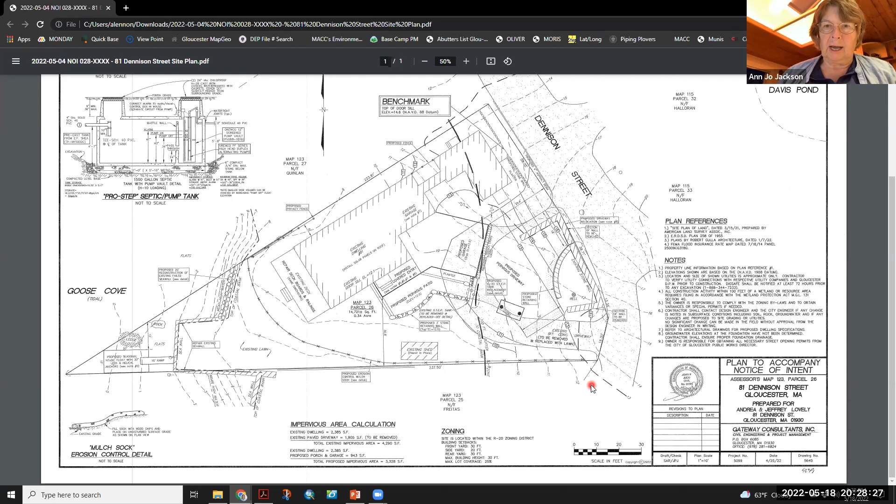That's primarily my major concern. Okay, Ms. Davis, just for clarification, you're concerned about the grading at 81 Dennison, right? Not at 79. At 79, because they want to change that because they feel like they can't see that good when they come around, they see the skyline or something. The project under consideration is at 81 Dennison Street? 81, that's right, I'm sorry. Yes, I'm sorry. But that's where you're concerned. Yes, that is my concern. Yep, that's right. Sorry about that. That's all right. Just wanted to make sure we knew what you want. No, thank you for that clarification. Yeah, so that's a huge concern. Because I mean, and then in the wintertime when it floods, then it freezes and it's just a nightmare.

So if that's gonna be any worse, it can't be any worse. It's gotta get better. We've been waiting to see if we could get the city to do something to make it better. But this frightens me that it's gonna make it a lot worse, and I just don't know what we're gonna do about that. So that's my big concern.

I just wanted to also say how my brother-in-law and sister-in-law were really careful about trying to make sure things kind of stayed conforming to the neighborhood. Okay, and so that's all I have. Thank you, thank you very much.

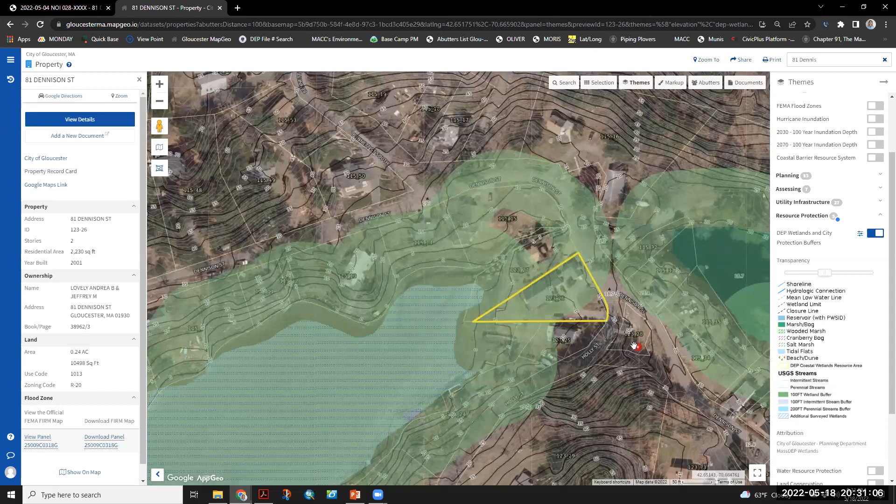And it would redirect all that runoff. So that's concerning, and it's been suggested to me that there are ways to mitigate this that could be incorporated into the plan, but I don't see those in the current plan. And there are a couple things in the plan that are a bit confusing for me that I have questions about that maybe can be clarified today.

They talk about repair, which makes sense, but there's a bit of a contradiction when they bring up perhaps removal of the wall entirely, adding new materials under and behind it, plus the fabric, and then potentially having to add new stones to the seawall. And I wonder if that changes the height of the seawall. My understanding from the Conservation Commission is that that's not allowed, but in the notice of intent, it's described as a presumptive height of 8 feet on the riprap tumble down stone wall.

And it's proposed to bring the riprap tumble down stone wall, which joins with our property line, up to a presumed previous height of 8 feet. But that riprap stone wall slopes down towards the built wharf or seawall, which stands now at about 4 to 5 feet—I've stood out there over the years and it's at about 4 feet where it meets up with the riprap tumble down stone wall. Out at the edge nearest our property line in the mud flats, the wharf is at about 54 inches. So how do you bring the riprap tumble down stone wall up to 8 feet without also adding earth to the yard? Is that the plan?

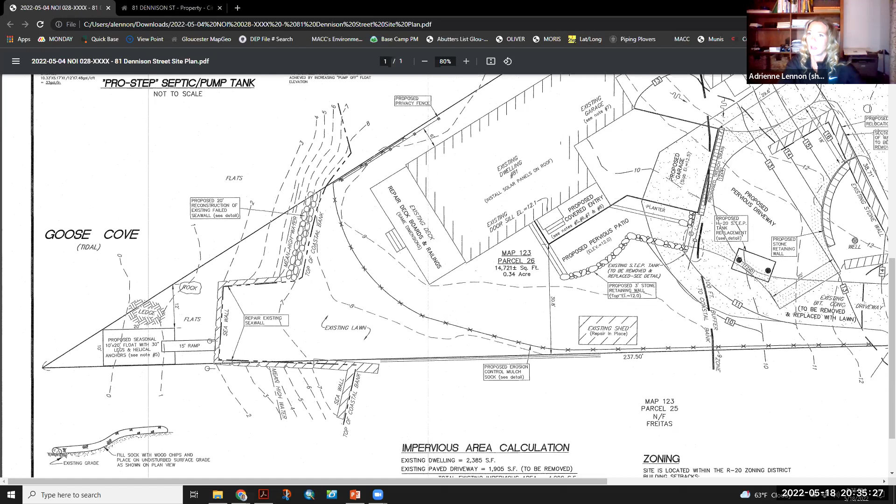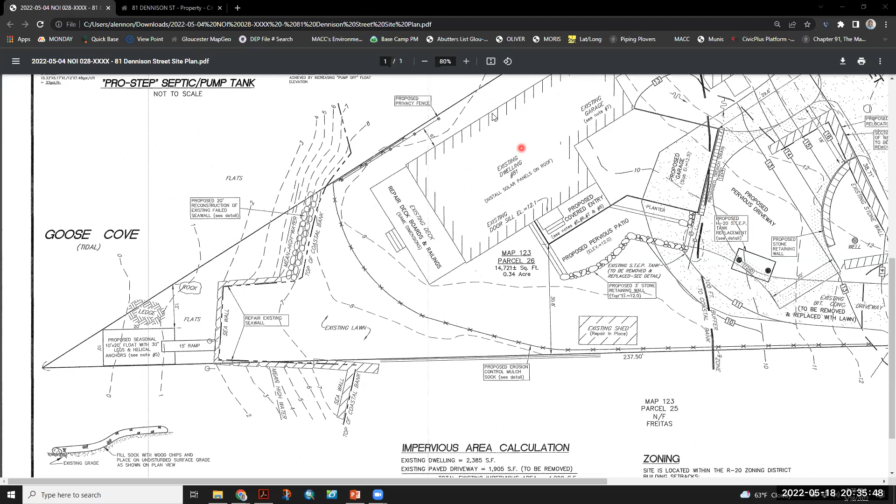Yes, I live at 75 Dennison, so I am the property adjacent to 79 across the brook, and so I look at 81 Dennison also. So my comments, one is the need for clarification as well in terms of what will be happening to the wharf wall, and I'm calling it the boulder wall.

I just want to confirm that indeed the wharf wall will not be raised at all. I know that in the writing I was a bit confused. It sounds like that's the case, that it will not be raised. And the boulder wall, I am also, as Kai was asking, kind of confused about whether they will remain in the planning, a slope going from where the yard stops and would meet the boulder, and then would the boulder slope down to the water. Also, people need to be able to stop further erosion to their property, but from my understanding the yard is not going to be expanded, that it will be where it is right now.

But also I'm having trouble visualizing if I'm going to be looking at kind of a vertical 8 feet, or a sloping kind of boulders to the water. So there's the visual aspect for me, just trying to figure it out to visualize. But the essential point of my concern is certainly the one of what it may mean for the water level to my property, because right now I don't have problems, and I'm really concerned.

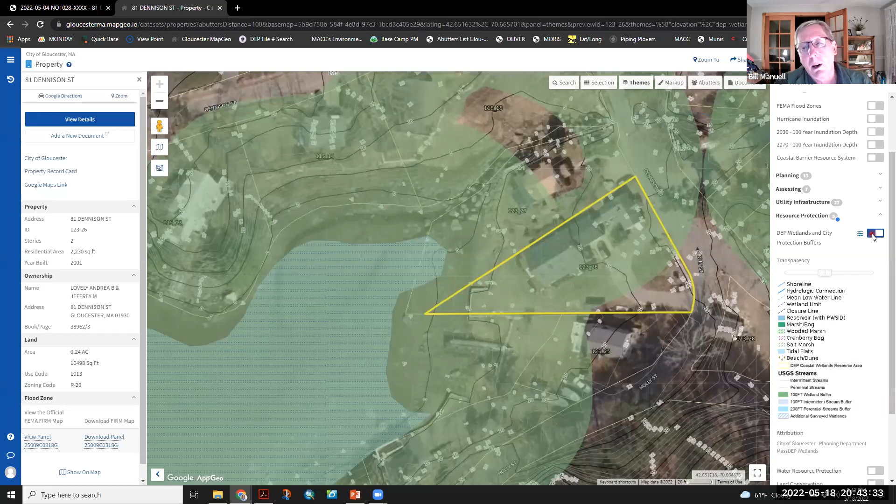I think another question was, will this divert water to other properties, or will the activity on the site divert water to other properties? And the answer is, I don't believe it will. Number one, if we're talking about coastal flooding, the area, the entire site, as well as all of the homes at the top of the cove, are encumbered by coastal flooding in a large storm event. And as you know, there's only one way for stormwater to enter the cove, and that's through the culvert down at the causeway. So as the tide water advances, all areas of the surrounding properties are going to be inundated equally. This particular project doesn't raise the grade at all, so it's not going to divert or cause diversion of any of that advancing tide water onto other properties. It's all going to, just as a bathtub fills up equally, that's what happens in the cove, and everywhere that's predicted to be inundated in a 100-year event is going to get inundated in a 100-year event equally.

How would we build the wall without impacting the wall on 79 Dennison? When we get close to the property line, we have no intention of straying across it. The excavator will place those boulders in carefully and work within the confines of the existing property. Fortunately, we're working with large boulders and stone wrapped in filter fabric, so it's a fairly simple bank stabilization technique, and I don't think we'll have any problem staying within the confines of 81 Dennison.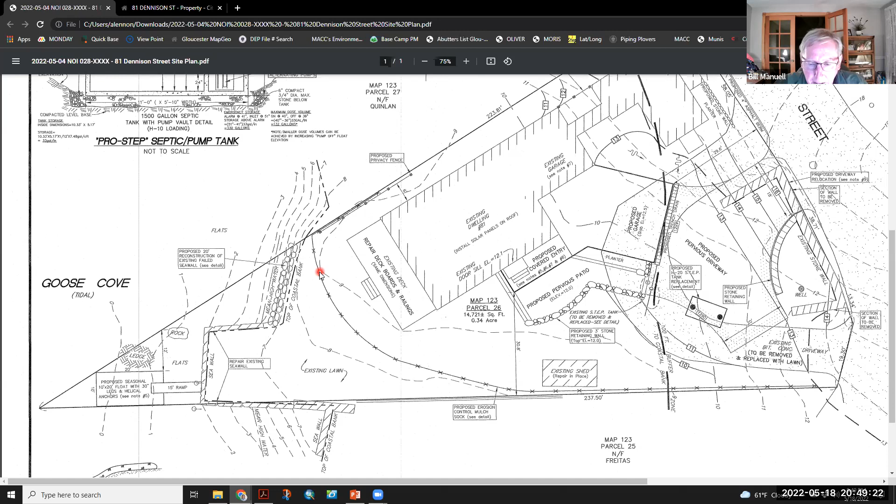As for Eileen Dion at 75 Dennison Street—when I was explaining to the Lovelies how this would work on the repair of their boulder wall, I pointed to your property, which I worked on several years ago, and said that's basically Exhibit A, that's what we're trying to accomplish. A lot of the walls were sloughing down and the slopes were eroding directly along the marsh and the cove. We laid in large boulders at the toe of the historic boulder walls, coming up at basically a 1-to-1 slope to meet the height of the existing lawn. That's essentially what we're trying to accomplish with this short section of boulder wall.

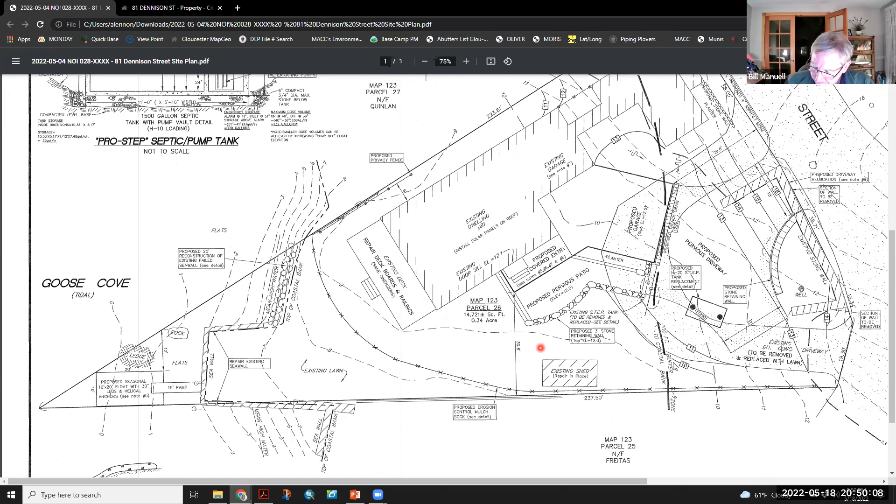The seawall itself is not being raised at all—it's just being repointed, and any loose stones will be reset. As for your question about water level on your site in a large storm event, the whole cove area, the top of the cove, is going to be inundated equally, and there's nothing we can do about that.

But in terms of any runoff caused by this project, I think we've improved the situation by reducing the amount of impervious area. As for what's happening on Dennison Street, none of this work, which is 6 feet lower than Dennison Street, is going to have any impact on exacerbating conditions there. I don't believe it will improve it, but this project being lower, with water shedding into this site, is not going to have any negative effect on Dennison Street.

So that's all I have to say. Okay, good. Thank you very much, Mr. Manuell. I appreciate that.

Adrian? Or me? Would you like to hear from me? Yes. Okay.

So I want to express that this is a very common single-family home project that the commission sees with fair regularity: removal of a driveway and installation of a pervious treatment for impervious calculation purposes. I appreciate your installation of a trench drain here. I realize it's probably a necessity, but if you wanted to incorporate that into all of your pervious driveway replacements, that would be nice too, where possible.

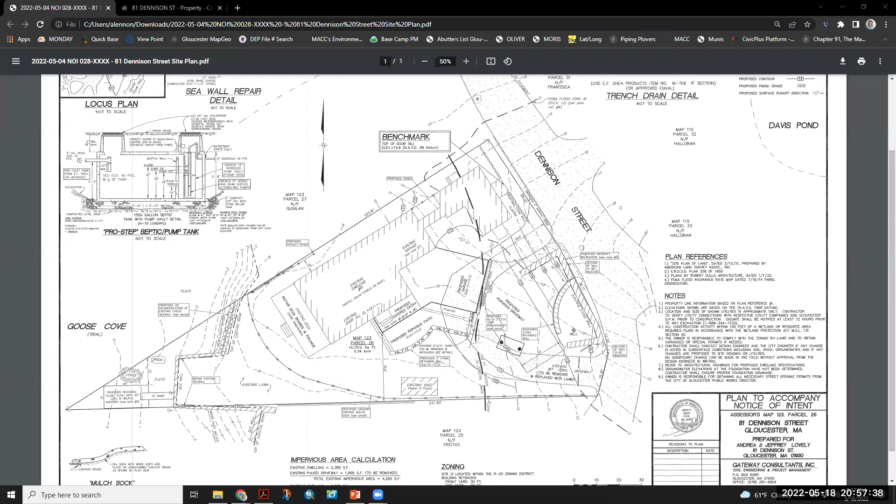Commissioner Gradwell: I assume that this wall is not armoring the bank, and regarding Bill's comments about attaching it here, I would like to express my concern. There's no question the 4-inch berm will stop some street water from coming onto this lot. Removing the driveway absolutely helps, but you're just moving the problem from one lot to another. Thank you.

Commissioner Sargent: I'm sorry, but I have another riverfront issue. I believe Goose Cove is part of the Annisquam River, and therefore riverfront review is applicable, even if for some reason it incomprehensibly is not. I still believe the riverfront from the perennial stream that drains what was historically known as Duck Pond, labeled Davis Pond on the plan, would still be applicable. The neighbors call that the brook. I'm wondering if there's a Chapter 91 permit for the seawall in the adjacent area, which is probably filled tidelands.

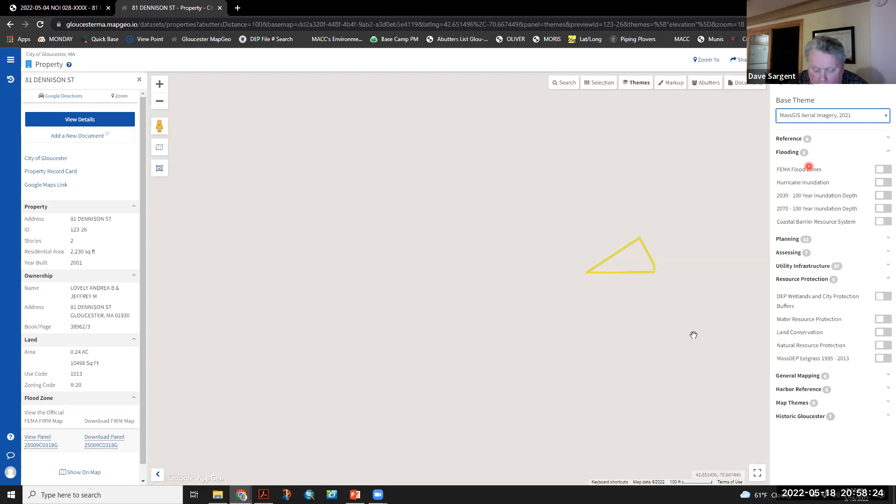The float location is very close to both property lines. The Army Corps of Engineers recommends docks not be located any closer than 25 feet from an abutting property line. This prevents interference with the neighbor's riparian and navigational rights should they or a future property owner also want a floating dock. It would be problematic for the commission to approve a project that interferes with the abutter's rights without a legal mechanism providing for such an exception. The applicant should obtain written acceptance from both abutters that this proposed floating dock would not impact their riparian or navigational rights. Finally, all material for the floating dock needs to be non-toxic to the marine environment. Thank you.

Commissioner Sherman: Sorry about that, I have nothing further than what has already been expressed by other commissioners.

Chairwoman Jackson: I would just like to review the homework here. We talked about the attachment of the wall to the ramp; we need further detail on that, and any pad that may be involved. Any relief needed from the Zoning Board of Appeals or other agencies. DEP comments, I'd like more detail on - my understanding was they were questioning the location of that extension of the seawall. Is the deck being repaired pervious? Are you using any fill anywhere? You're replacing the septic - we need comments from Harbor Master, Shellfish, and DMF. I appreciate you looking out for the berm and finding out what's going to happen there. We have to find out if it's riverfront, and about Chapter 91 and setbacks for docks. Your comment about the driveway entrance being lower made me question the surface of the driveway being pea stone - is that steeply sloped, and how is that going to work?

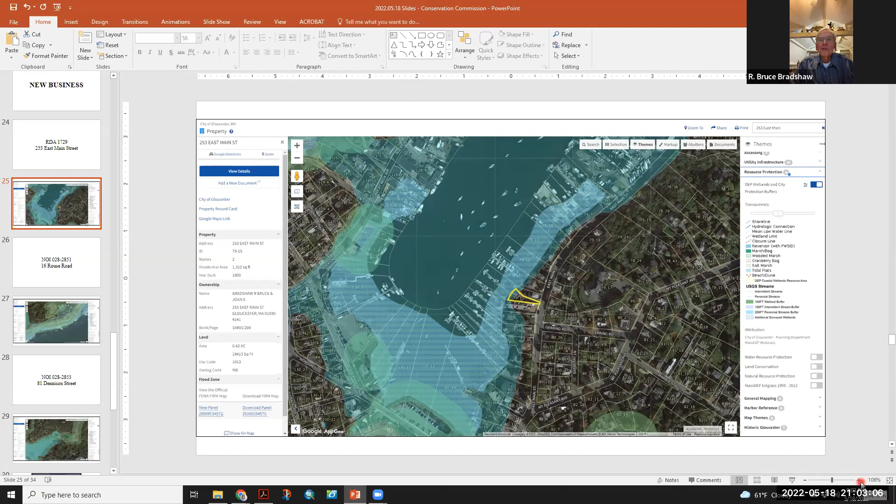Robert Bruce Bradshaw, 253 East Main Street, Gloucester. I'm submitting a request for determination for my float system. I'm requesting to install 2 pilings at the end of the runway of my float system in deep water here in Smith Cove. We had some really bad, nasty winter storms - some floats have torn loose, some boats have torn loose. And frankly, I'm getting too old now - I can't run down in the middle of a winter nor'easter with anchors and ropes to stabilize those floats.

I think 2 pilings between the runway, at the end of the runway and the T, will stabilize those floats, even though I have 6 helix anchors down, and would just be safety and security for me and my neighbors. So that's my request. It's pretty straightforward.

I have Smith Marine contracted for this, and they do Alexander's and the railways. They're very good, recommended by the harbor master. That's the request, it's pretty straightforward. I'd be happy to answer any questions. Great, thank you very much.

First, we ask for comments from the audience, and any comments you will answer then, and then we do commissioner comments and questions. So I will open it up for public comment right now. Do we have anyone in the audience who wishes to comment on the project at 253 East Main Street? Madam Chair, we have 8 panelists, 7 attendees, and no members of the public to comment at this time. Okay, thank you. Then I will close the public comment period and move on to commissioner comments.

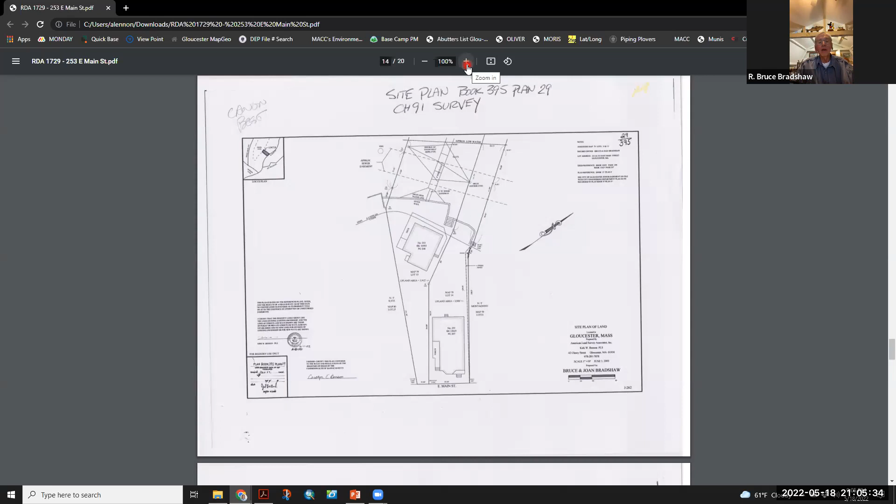I think you can see it in red there. It's in deep water, 8.5 feet at the flood neap tide, and most of the time it's 9 to 16 feet of water. Just 2.

Okay, are they shown on the drawing? Because I'm just struggling, I just can't see them. No, I can't find them either. Chapter 91 plan, I didn't get them in there. No, they're on this, I just forgot to do it.

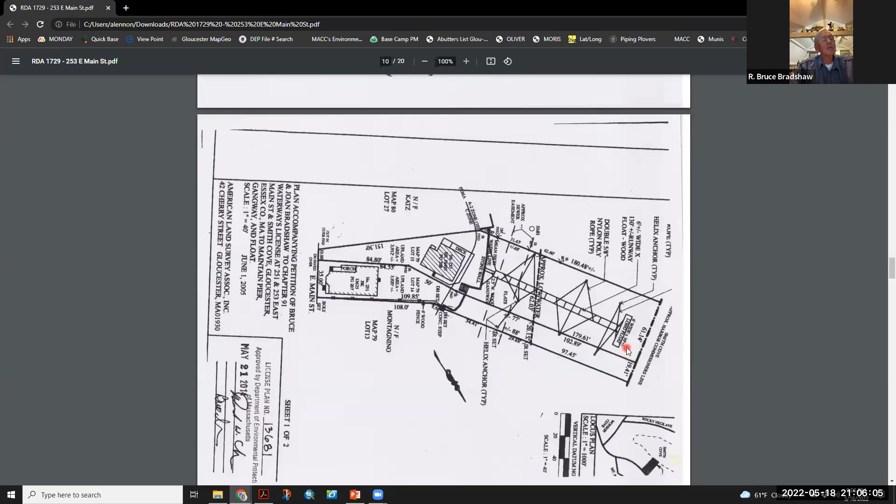If you go down the runway to the end where the runway meets the T, there are 2 4-foot steel angle braces there, and put a piling on each side between the angle brace and the V notch there. Okay, then I'm fine with it. Thank you.

Commissioner Gradwell: no further comment now that we know where he's talking about.

Commissioner Sargent: I know why he wants to do this, but these pilings would not be able to be removed seasonally, as the Chapter 91 permit is conditioned for the floating dock system. I believe this should be an NOI by definition, because the pilings would be permanently installed within a resource area and would have a permanent and potentially negative impact on that resource area.

Thank you. Okay, Commissioner Sherman: no comments. Chairwoman Jackson: no comments. I'd like to hear from you on Mr. Sargent's comments, however.

I will say in the harbor, it is very common for us to do piling installation in deep water and also in the tidelands under an RDA, where there is already a pre-existing ramp and float system. So while this is smaller than most projects, I don't think that it's going to change the nature of the Chapter 91 licensed structure footprint, and therefore it's really stabilizing something that is already in existence.

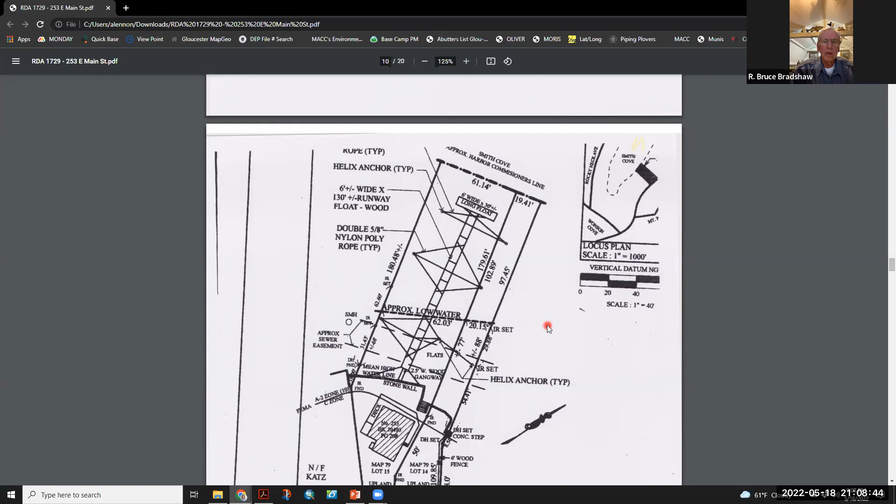The Smith Marine is very good, they do all the work for the railways and Alexander's. I'm sorry, a gentleman, I believe Mr. Sargent, I didn't understand that. The Chapter 91 license that I have is for year-round floats, permanent for 30 years. It doesn't say anything about removal in the winter or anything like that, and no one here does. So I didn't understand that. I think the license is for year-round. In fact, I know it is.

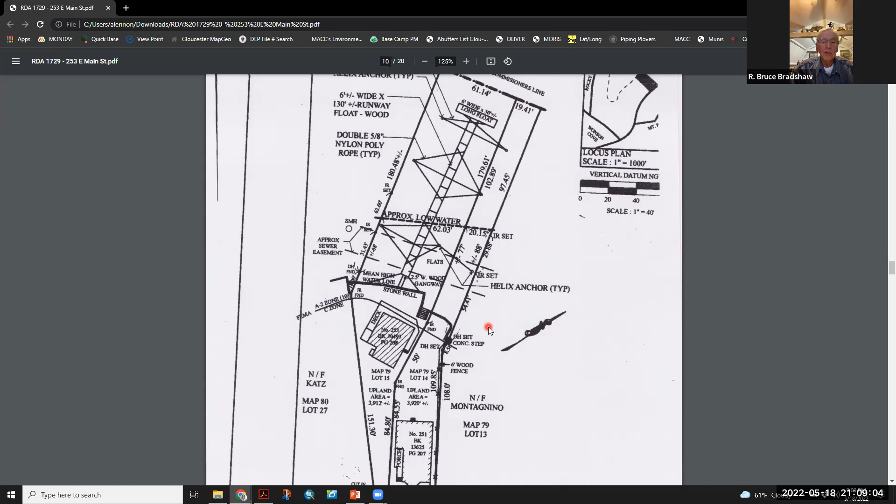Back to the other thing, Smith Marine guarantees that they will do everything to code and that they will mitigate any spills or anything like that, there wouldn't be any spills. There's no fuel or anything involved in this, only on their barge. But the contract, I can read you the contract details if you'd like. I see it, I'm refreshing myself on it. I read them yesterday and a lot has happened since then.

Okay, thank you, I appreciate that. I do see that my neighbors have pilings, and there are pilings all over the cove. The whole side of the cove with the railways and everything on the west side of the cove is pilings.

Okay, thank you very much. I appreciate your explanation and I personally am ready to move forward with this. Mr. Sargent, would you object strongly to that? Not strongly, but yeah, I still think it's precedent setting. Okay, well, we have generally approved pilings on existing docks, but okay.

Let's move forward, and unless anybody else has comments, we will move to close the public hearing.

Charpentier moves to close the hearing for RDA 1729 at 253 East Main Street. Gradwell seconds. Roll call: Commissioner Charpentier, Yes. Commissioner Cook, Yes. Commissioner Gradwell, Yes. Commissioner Sargent, Yes. Commissioner Sherman, Yes. Chairwoman Jackson, Yes. Charpentier moves for a negative determination for RDA 1729 at 253 East Main Street.

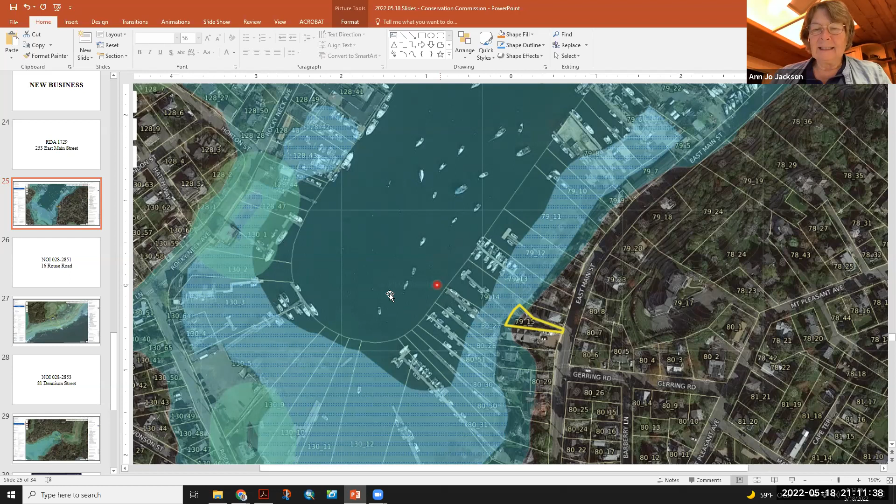I appreciate your patience. Wasn't your fault. No, okay. Let's move on to other commission business with extension 0282651 at 21 Bale Lane.

Bale Lane Beach Association, represented by Daniel Buonaconti at Foster and Eldridge LLP. All right, Daniel, I see you in attendees. I'm just going to allow you to talk and ask you to unmute from there. You can talk a little bit about the Bale Lane beach permit and the extension request.

Good evening everyone, can you all hear me? Great, thank you very much for putting this on the agenda. I'm actually a resident of Bale Lane, so I'm just the representative. Don't let the law firm name fool you, I'm not an environmental lawyer. The application is really straightforward.

We have an order of conditions or permit to maintain the access through the dune to the beach at the end of Bale Lane, and we're really just looking to renew or extend it, whatever the proper term is. The existing order allows us to maintain the pathway to keep it straight so we can roll out one of those Mobi-mats, those permeable removable mats. Ours is only 3 feet wide. It's really tremendous, it enables us to direct traffic specifically to this 3-foot area.

And it's much safer and enables everybody on the street to get down to the beach, where some of our residents are getting more advanced in age. The ability to walk on one of these things down the dune is terrific. We don't change the height of the dune at all. Our permit only enables us to level it horizontally left to right, so that when we roll the mat out, it doesn't slope down one way, so you're not walking off the side of it. That's really it.